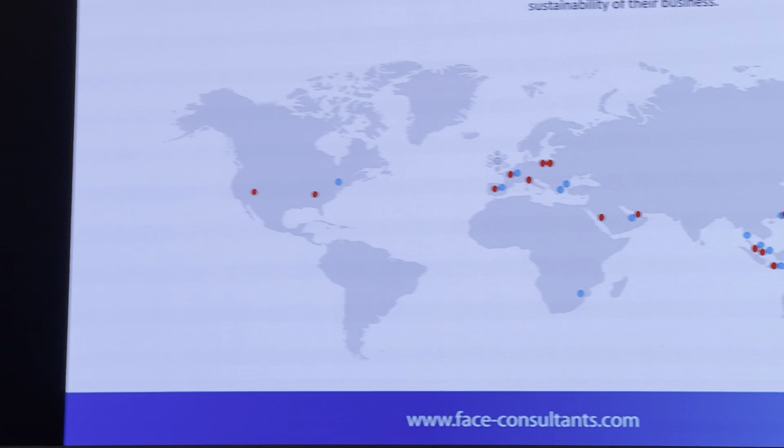So we're going to just flick in here, a little bit of things out of the way first of all. Face Consultants, this is a dual presentation anyway. Face Consultants is part of the CoGri group, and I'm doing this presentation under Face because it's a bit of a consultancy exercise. So Face Consultants are experts in the design, surveying, and testing and commissioning of concrete flat floors. We're also independent. Face is independent from CoGri when it comes to the consultancy work that it does.

CoGri, on the other hand, is a solution provider for design and construct of high performance, high tolerance concrete industrial floors. And these solutions are fit for purpose. I think on here you can see we've got red dots and blue dots. The red dots are CoGri and the blue dots are Face. So you can see that we're scattered around the world, making the world a flatter place.

So on to the next one. Today we're trying to make it more localized. So in terms of our setup in this area, our head office for Asia is actually in Singapore. We have a satellite regional office in Seoul, Korea, and from Singapore, for the ASEAN region, we have an office here in Kuala Lumpur, and we have FACE and CoGri there, and then we also have an agent in the Senai area.

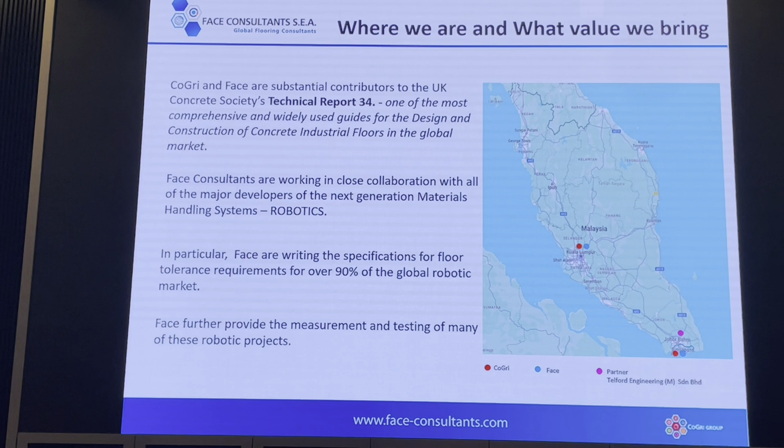Yeah, there you go. Amazon are one of our big clients globally, and they've got robotic stuff all over the place. There's a lot of other people getting into it now, and we write the specifications for over 90% of the market. Sorry, floor specifications, not robotic specifications.

Okay, I'm not going to read out all these words. I think we'll just get to the point here. Where is it? Okay. Just thought I'd give you a little bit of my background and how I became involved in flat floors, because it's a lesson. First of all, I graduated from the University of Dundee in the UK about 1974, with a degree in civil engineering. And I've been registered as a professional engineer in Singapore for over 34 years.

Overall, I have 50 years of experience working in the construction industry, not always in floors, but in general contracting and other specialist type of activity. But for the last 30 years, I've been involved in CoGri and developing the flat floor technology in Asia. Now, our head office is based in the UK, and the guru of our business is actually based in the UK, but he does pass on a lot of information to us.

Now, it was in 1991 when I was working as a design build contractor that we were approached by a European company to build the floor, and they said they want to do it for a VNA. I said, well, what's a VNA? So I didn't really know. Building tall buildings, you don't do VNA in tall buildings. So it's my first experience of talking about logistical facilities. So what's VNA? VNA is very narrow aisle. All right, okay, I understand. What do you want from that?

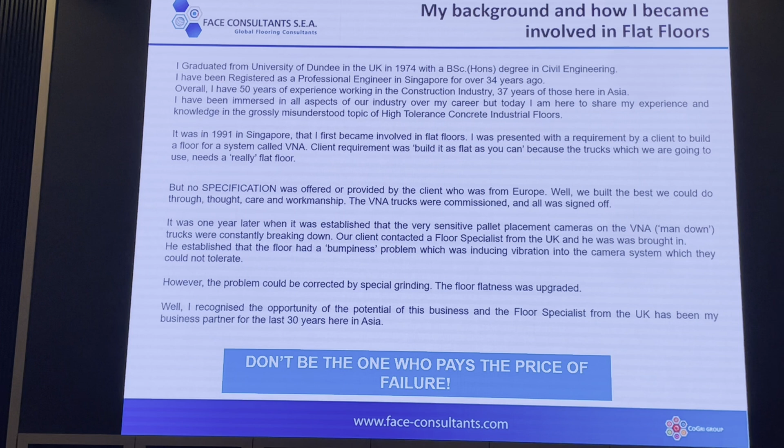And the big thing that came out of it all is that he and I became partners in Asia. So that was how I got into this business. But I was lucky, so my advice to anybody is, don't be the one who pays the price of failure. And I wasn't, so I was very lucky.

Okay, where do we start? Alright, so the whole point is fit for purpose, so we need to give a definition to that. What something is supposed to do, how it is supposed to do it, and what standards it must meet in order to be considered successful.

Right, what is fit for purpose in a warehouse or an industrial building or a logistical building? Yeah, the warehouse, the materials storage system, the material handling equipment, and the floor must act as a single interconnected system and perform optimally. So they all come together to work. The machines that they put in there, the mechanical handling equipment, they need the floor. So this is one of the starting points that we need to get established.

In the next 10 slides, I'm going to try to identify most of the key people who will most likely be involved in floors which need to be fit for purpose. And following that, I thought it'd be useful to give a bit of history on the development of high tolerance floors. Because without understanding the history, you can't understand what the problem is. Of course, there is a problem.

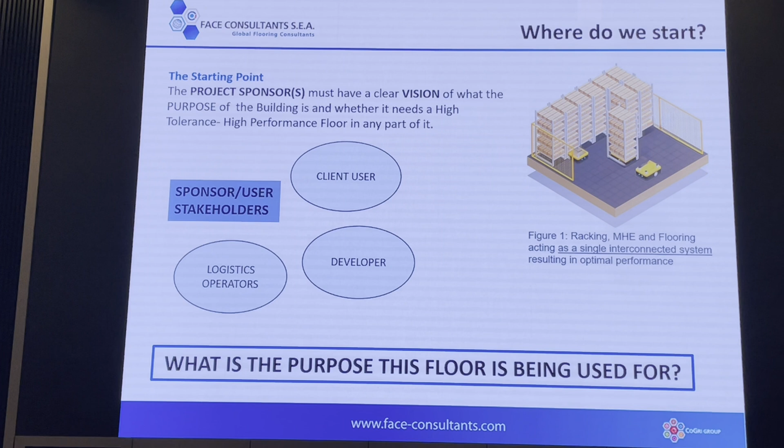Typically, buildings with flat floors only have a flat floor in some area of the building. It's not the whole building sometimes, especially in the office. You don't need a flat floor in the office. You need it where you need it, and you've got to decide which part of the building has to be flat. But these should start off with what we call the project sponsor.

And it could be the client user, it could be a developer, it could be a logistics operator, right? They have to have a clear vision of what the purpose of the building is and whether it needs a high tolerance floor. And these people that are going to sponsor the project, they're people that want to maybe use the building as a facility for supply or whatever it is.

And basically they'll go to a materials handling company, or they'll go to a system integrator. A system integrator is a company that specializes in integrating equipment and racking and all the rest of it, bringing it all together, working out throughputs and productivity. And these material handling people will advise the project sponsor on how he needs this building to function. And they're typically, as I said, material,

Pointer problem. Here we are.

Right, so we've got material storage suppliers, system integrators, and MHE providers. MHE meaning material handling equipment. So they're the second set of people, and they honestly have to rely on the floor. If the floor's not right, there's not much they can do about it. They need to come up with their specification as to what the floor should be.

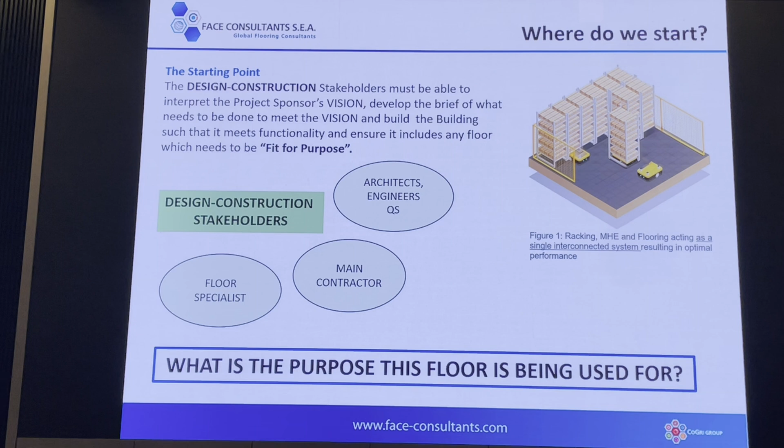One thing to remember in this development is that not all concrete floors require to be high performance or high tolerance, and they can still be fit for purpose. We're not trying to do floors just because we want work. If somebody can get a floor that's plus or minus 100 millimeters and it works, that's what it needs to be. So you don't waste your time on work like that. But floors are becoming more and more important with time.

Okay, so as I said earlier, we talked about the history. We are going to talk about really the history behind why we've got the specifications for flat floors. So I looked up Google and said, what does history teach us about construction? And just to give a definition from Google, we can learn from the mistakes of the past, build on the methods that worked, and repurpose old ideas to create new ones. The history of construction is endless, and new techniques and materials are created every year.

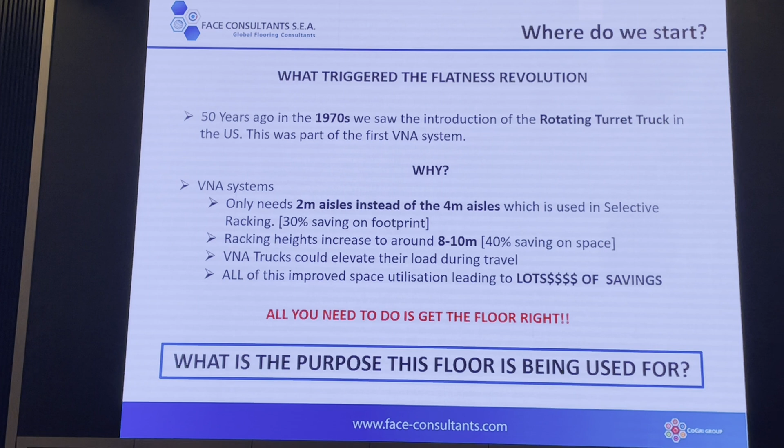So 50 years ago, that's the 1970s, we saw the introduction of the rotating turret truck, a VNA truck, in the US. The US were first in doing this, and this was part of the first VNA system. Why? VNA systems only need 2 meters of aisle instead of 4 meters of aisle, which is used for selective racking or general storage. This creates a 30% saving on footprint.

The next one is the racking heights increased to around 8 to 10 meters, 40% saving on space. And the VNA truck could elevate the load whilst it was travelling down a very nice flat floor. It could elevate itself while it was travelling and then place the pallet, all giving good productivity. We want 2 machines, not 3 machines. We want to be efficient.

And all of this improved space utilization leads to lots of savings. We do not create equipment and things just for the hell of it. We do it because there's got to be a purpose. And the purpose is to save money and utilize less land and all this.

So, it didn't stop there in the 70s with the VNA. At that time, in the 1970s, that first machine I was showing you there would probably do about 8 meters. In the 80s, it went to 10 meters. In the 90s, it went to 13 meters. In the 2000s, it went to 15 meters. In the 2010s, it went to 17 meters. And they're now telling me in the 20s, we're now up at 20 meters high with these machines.

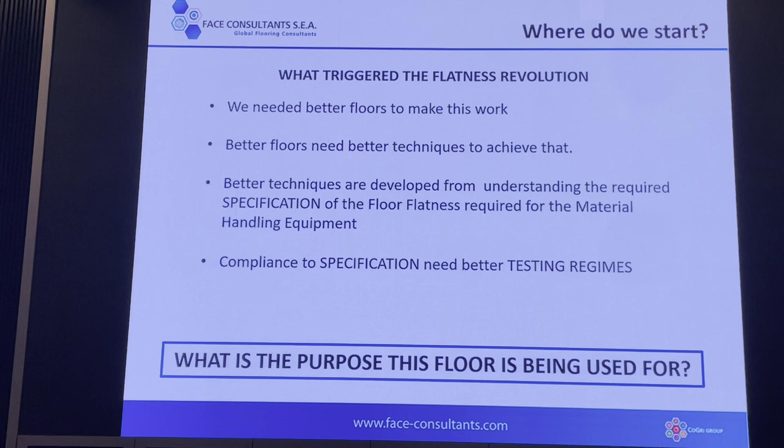Right, so this VNA development in the 70s led to a decision in the US to review the flatness requirements of all types of floors, including industrial, commercial, and ancillary. But I will tell you now, it has not kept pace with this since its inception. And we're going to address that one a little bit later. And again, I mentioned robotics. We're now in another revolution going on called robotics. We're going to also deal with that another day. So you can see I'm streamlining the talk because it's a big, big subject.

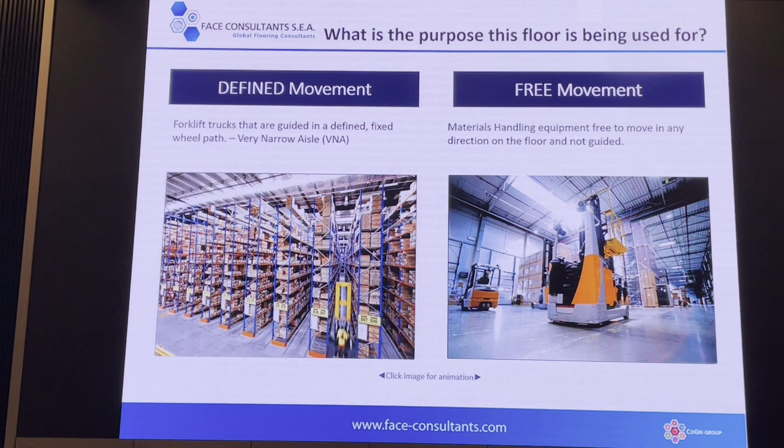But some of these systems are part of one of two categories. There's two categories for definition. This is the first point to take note. One is defined movement, and one is free movement. So, defined movement is like we started off talking about, the VNA. That is defined. What does that mean? It means that the trucks are sitting in one track all the time. When they enter that aisle system, they run up and down, the wheels are running in the same path, day in, day out. And it doesn't change.

So the specification for the defined movement is to deal with the wheel path in front of each wheel, but also the transverse, because you don't want the forklift trucks hitting the racks and all this, and you need flatness for all that. So that's one aspect, is defined movement. I think it's called something different in the US. This is the TR34 British name for it, defined movement.

The free movement, on the other hand, is where trucks can move anywhere on the floor. Unfortunately, due to technology of the slide system, they can only move across the page and up and down the page. But actually, we know that free movement trucks, or normal forklift trucks, can do U-turns, they can run diagonally, they can do anything they want. But we didn't manage to find out how we could do that pictorially. So this is the difference. Free movement trucks can move anywhere, VNA are stuck inside the aisle.

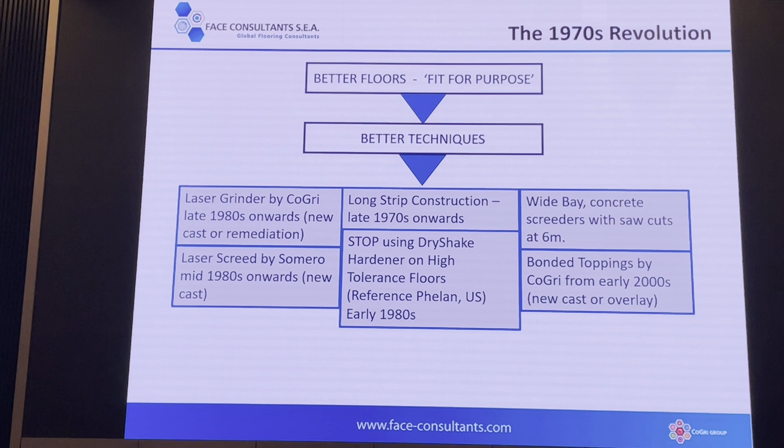Right, so what we said was that better floors that are fit for purpose need better techniques. So I've only listed a few here, just to give you a feel for what we're talking about. So the one in the top left-hand corner, the laser grinder, which was invented in the late 1980s. And this machine actually can grind concrete to correct VNA aisles for the use of the VNA truck. And it can do old floors, or it can be done on new floors. So that was one machine that came out that made floors a bit better.

The second one here is down below, and this is the laser screed by a company called Somero. And I would say that this laser screed has built the most floors worldwide, but these floors tend to be on the ground floor. This is one thing we need to understand. Floors in Europe, the UK, and America, basically they build all their logistical facilities on the ground floor. You'll see the picture in a minute about that.

But basically, the trucks with the concrete can come in and do direct discharge, and then the laser screed can guide it, level the concrete out, etc. That is the first part of the action. And it vibrates, so it places all in one, so it's mechanized. And that's how this machine revolutionized the industry in terms of doing bulk, large pours.

There was another system, which is the long strip system, and this was also for VNA, and basically it's a way of setting up the concrete and casting the concrete in narrow areas so we can control the levelness across the aisleway. And this became very, very popular. We did what we thought was the first super flat floor in Asia. We did it in Singapore in 2000. So that's 24 years ago. We did that one with long strip, and it was spot on. It was a DM2 or category 1 at that time.

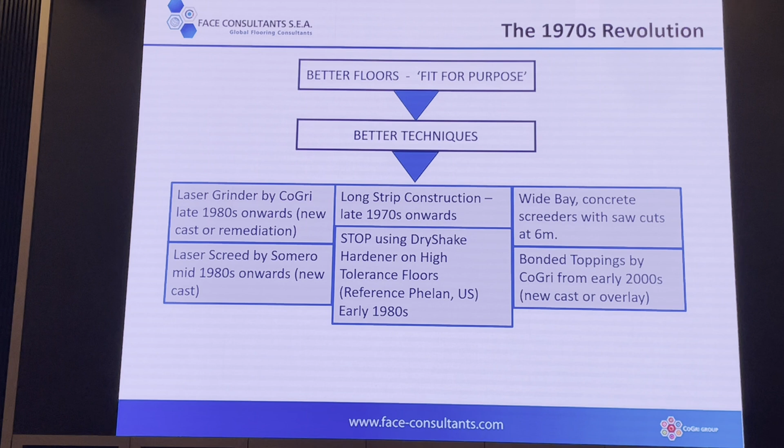The one down below, bonded toppings, is something that we developed in 2000, just after the super flat floor. There are certain countries in this part of the world that have not so much land space. Singapore's obviously desperate for it, and if you talk about doing flat floors on suspended levels, Singapore and Korea probably lead in doing these things. And the only way to achieve really proper floors in elevated buildings like level 2, level 3, level 4 is to do a bonded topping.

And that means you get the floor constructed, you get the building constructed, you close it off, and then you come back and you do a secondary floor on top, bonded to the structural floor. This bonded floor actually gives you the floor specification. It gives you the flatness, and it gives you the soundness within the environment, which we're going to talk about as well. Now I'm going to come back to this one down the bottom because it's a bit contentious in Malaysia, I have to say.

All the time that I have been, and maybe I should say something now, we've been doing work in Malaysia now for nearly 30 years, maybe 25 years, something like that. And we set up a company in 2008. We actually put a company in place at that point in time. But we are very well aware of Malaysia. I've done a lot of other work in Malaysia as well.

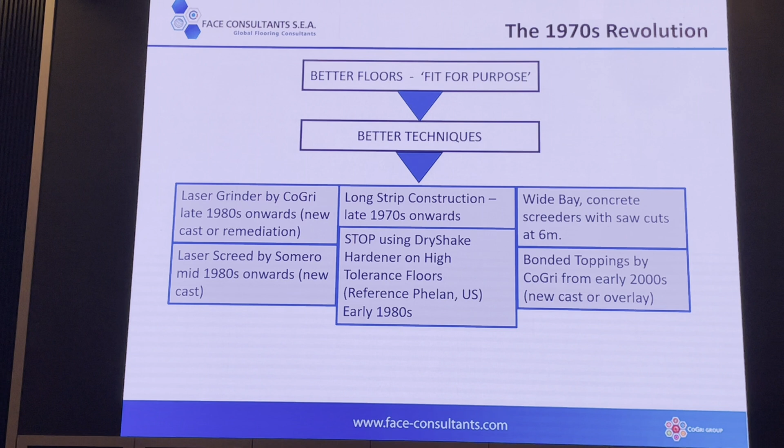But there is an issue in Malaysia where there's a myth, and that myth revolves around dry shake hardening. So in the US in the 70s, 80s, there was a very top level concrete guru called Phelan. You can go on the internet and find out plenty about it. He did a lot of special precast and all that. And he said, maybe only 45 years ago, you want a flat floor? You want a good floor? Stop using dry shake hardener. I'll repeat, stop using dry shake hardener. It makes it more difficult to get a flat floor.

We knew this 45 years ago, and I'm sorry to say that we have this problem here in Malaysia, that hardeners are seen to be part of the process of getting a level or flat floor. Nothing could be further from the truth. And the second part to that situation is that in certain situations, having a dry shake hardener on top can lead to other problems like delamination, right? So we can go into that one.

People can ask, and the panel will answer the question if people want to know why. I'm not going to do it. It's maybe for my technical people here to tell us why. So if anybody wants to know, why? No? Okay. Maybe ask after.

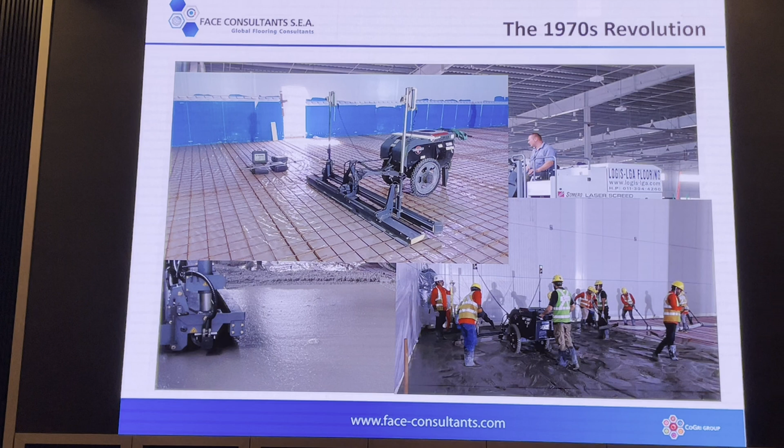Okay, so back to better floors. Better floors, which are fit for purpose, need better specifications. So the floor specification in the US, because they were the ones that started all this review, don't blame the Brits, right? It's Americans. So they said, look, we're going to have a look at this. And a guy called Allen Face, if you look at the Face consultants, there is a connection. But anyway, it's a long, long time ago. Allen Face introduced a floor flatness numbering system in the late 1970s, which later became known as the ASTM E1155.

FF numbers and FL numbers, and that was what was established. And this was established by the American Concrete Institute. And I'll tell you a little bit about that later, because one of the problems comes from that. I'm not here to criticize the ACI or the ASTM, by the way. I just want to explain to you what this all means. And since the 1970s, this specification had minor updates, but it hasn't changed the fundamental approach to it all. And a lot of times now, it's no longer relevant to what's going on.

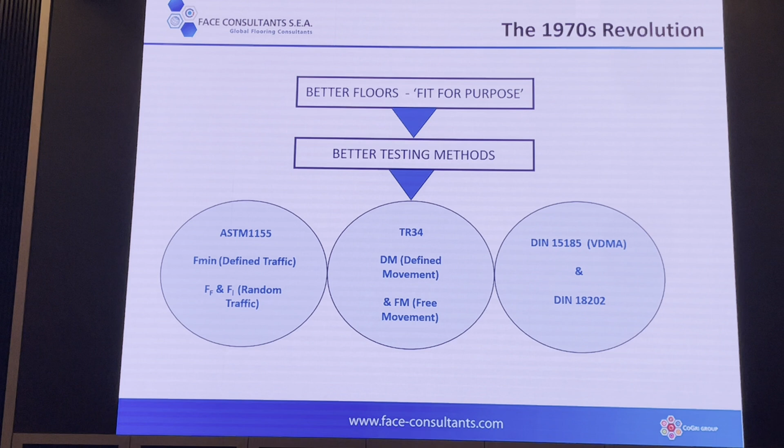Right, so better floors fit for purpose, we needed better testing methods. So at the same time that they developed the F numbers and all this stuff, we say, how are we going to test it? We might say we're going to do this, but then how are we going to test it? So the ACI did their bit, and I'm just going to differentiate across the top here now, and maybe I can point to it.

This one, ASTM 1155, FMIN, defined traffic. TR34, defined movement. Same thing. DIN 15185 and VDMA. Same thing, measuring the, well, free movement. Sorry, defined movement. Then one down here, the F numbers were produced for random traffic flows. I know that around Malaysia, they try and use this system to do this, and it's not right. But anyway, never mind. Free movement, FM in the UK, so FM means free movement, DM means defined movement.

And the Germans put out their one too. But I'm not going to talk anymore about the German one, because again, it's another subject. It could take another hour to talk about the German one. We're going to focus on the ASTM and the TR34, because those are the ones that are used around this area.

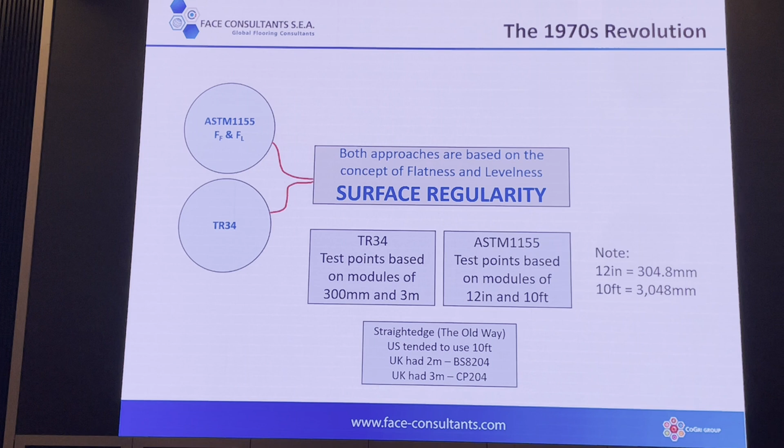Right, so we can see here the ASTM 1155, FF and FL, and TR34, basically I should have done the free movement. Anyway, both approaches are based on the concept of flatness and levelness. So they agree, their approach is to define something to do with the flatness and the levelness. And TR34 said, okay, if we're going to test the floor, of course it's all done by finding out what the elevation of the floor is doing at each point. They said, we want to test points based on modules of 300 millimeters and 3 meters.

They were following the Americans, because the Americans did it early. And they were doing test points based on 12 inches and 10 feet, because America is still imperial, and UK and Europe were very metric. So there is a connection back into the old specifications, because you can see down at the bottom here, straight edge, the old way. US tended to use 10 feet. UK had 2 meter and 3 meter straight edges. So this is all connected into the new, you're still trying to retain some of the old stuff.

But if you note on the right hand, that note says 12 inches is 305 or 304.8 millimeters, and 10 feet is 3 meters. So we're actually really measuring the same way and doing the same thing. It's the interpretation of the results that's the difference, not how we're doing it. So, high tolerance, surface regularity. It's just one part of it.

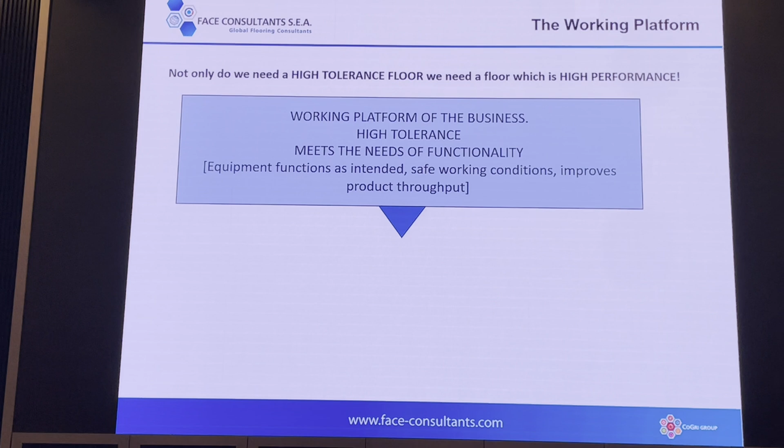So anyway, the first part of it, which is the high tolerance for functionality of the forklift trucks, it meets the needs of functionality. Equipment functions as intended. It's safe because if you've got bumpy floors, they're going to potentially cause accidents. And it improves the product throughput. If the machine's working at the maximum speed it can work at, it's going to give them the most productive warehouse. But high performance is a little bit different.

Okay, again, it's like the other switch. We're also talking about the flatness and how the thing changed. So the driving of the technology to get the flatness came from the equipment. But I'm going to do a little bit now on this high performance floor, because nowadays it's very, very important for a lot of people. So, 5 pillars to get a good floor.

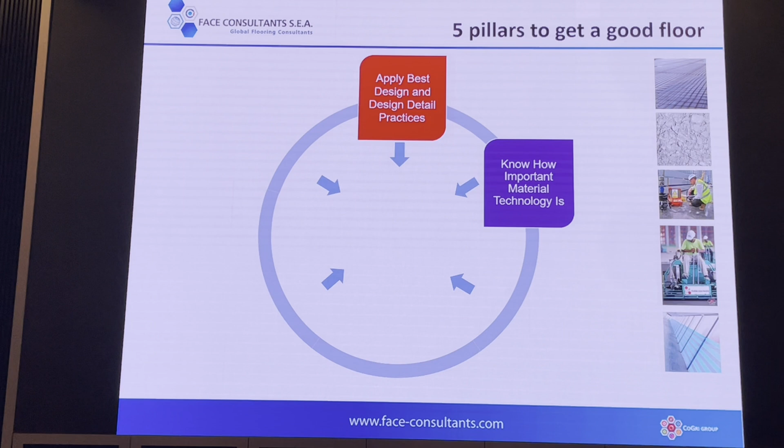Point number 2 is the know-how: how important material technology is. I was talking about this yesterday to Mr. Leon and his team about how we view things. And one of the problems in most parts of the world, a flooring contractor, if he wants to lay a flat floor, as long as he's got a good design, the next thing he needs is good material. Well, good material means concrete mix design. People don't understand that the mix design is so important in getting the floor flat, but also keeping it workable before you can get it all burnished off. So if you let that control go, it's a problem.

Here, the main contractor will say, I don't want to let you buy the concrete, I'm going to buy the concrete. Okay, you want to buy the concrete, that's fine. But basically you can't tell me what the mix design is going to be. The concrete we put into the floor is different from the concrete we put into the columns and the walls. It's not the same concrete. There you just put it in and you vibrate and it's finished. I've done plenty of it in my 50 years. But the concrete that you put into the floor has to be a special recipe.

Like your best pancakes in the world, they've got their own special recipe. If you take somebody else's recipe, you can't get the pancake that you want. This mix design is very crucial.

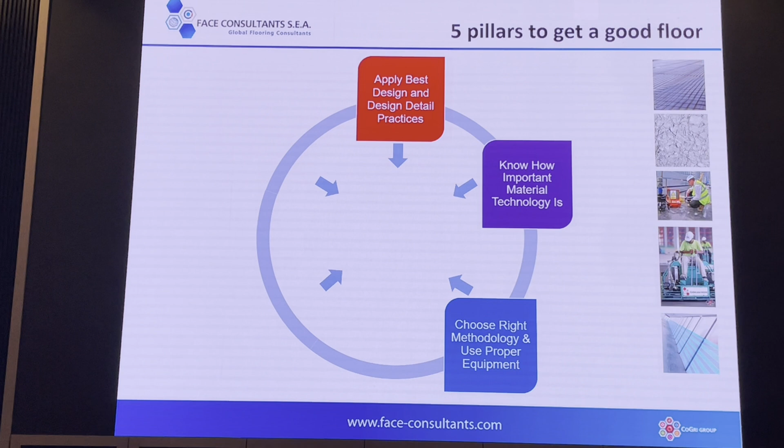These first two subjects are subject of a separate talk. Number 3, choose the right methodology and proper equipment. So earlier I showed you pictures of the laser screed and the CopperHeads. So basically, you need the right equipment to do it. So different ways of doing things. For VNA, you can use narrow, long strip construction, which is a narrow aisle, and basically you have to use certain types of equipment on that to get it.

When you do a large pour, you use those big machines, and in between you've got the CopperHeads and things. And there's other machines. So people need to know what equipment to use, and they have to have proper equipment. You can't have one machine and it breaks down halfway through the pour. You say, oh, what am I going to do now? That pour is ruined. So you need backup, redundancy in your process. So there are all these things you've got to think about.

The next item is, you need to engage the right people who know the flat floor technology. In Malaysia, achieving the highest tolerance of flat floors can be done quite readily. It is not difficult to do. With teaching, understanding and learning, all this can be done. Right? We've done it. We went into Sri Lanka about 3 years ago. They'd never done anything like it before.

We went into Sri Lanka. In fact, the second time we went, we did a floor, and everybody talks here about how difficult it is to get an FM2 floor. We produced a floor which was FM1, the highest tolerance of free movement. And we did it in Sri Lanka with people that had never done this thing before. So, you know, it can be done if you know how to manage it and do it.

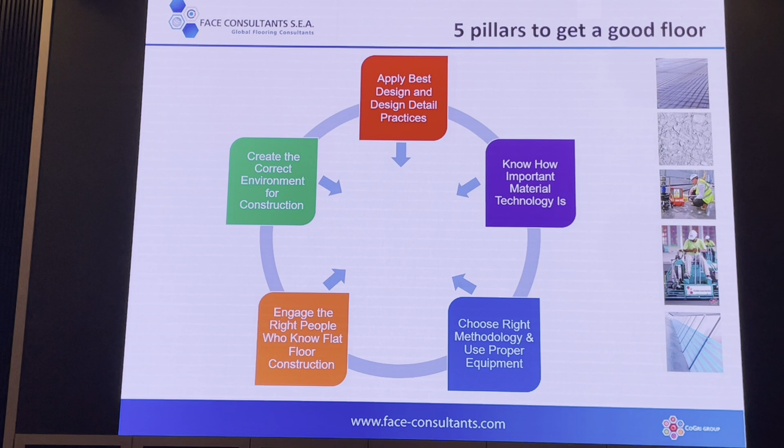But if you want a really good super flat floor, the rest of the world out there is doing these floors in the right environment. And you guys in Malaysia are not doing that. The number of projects I hear, you want a super flat floor without the roof on, without the walls in. This material that you've just chosen, spent a bit of money on, the proper mix design, it doesn't stop it from being affected by not only rain. Rain's a big problem. When rain comes onto a concrete surface, it ruins it.

But you've also got wind and sun. What do wind and sun do? You're trying to get a floor like a defined movement floor for a VNA, and you're trying to get 1-2 millimeters finishing. Suddenly the sun comes out and it's really blistering down. It will take all the moisture out and you can't get it finished at the right level.

It's a problem. And we have to first of all get everybody to understand and accept that you need to find ways to stop this. Every building in the world, in the UK, in Europe, in America, they're trying to do a really top-class floor. They'll get the frame up. Well, we did it here with Berrington with Tesco. The whole building has to be, the frame has to be up, the walls have to be up, and there has to be no leaks coming in and all the rest of it. The thing is, to build on a building like that,

if a builder can build a building at 1,000 square meters or 1,200 square meters a day, then we have a problem keeping up with it. But generally speaking, if you build a building and it may be a 30,000 square meter floor, it will take him maybe, I don't know, 16 months to do all that. But the floor, when you're using laser screed and you're doing pours with 35 meter by 35 meter panels, you're talking about casting 1,200 square meters a day. So 1 week, 10,000 square meters.

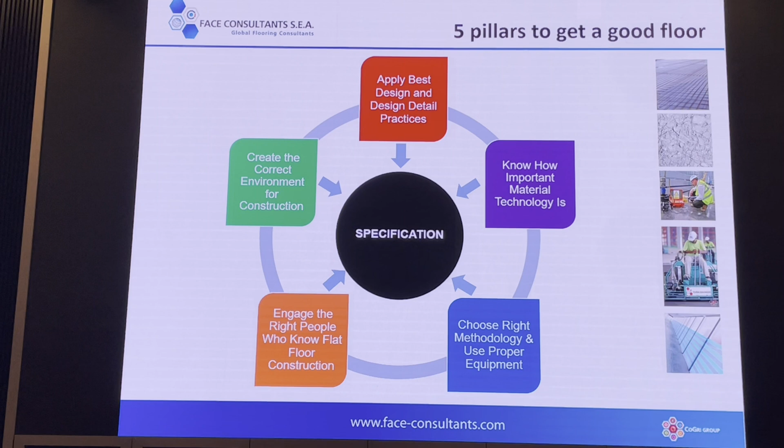Right. Now, all these things, these 5 pillars, have to be brought together in a specification. In the handouts today, I've put in 2 specifications. One's a performance specification for SFRC floors. You should not see any word of CoGri in it or face in it. It's a generic spec. But SFRC floors should be designed by the flooring contractor. Steel fibre reinforced concrete floors, sitting on piles. Let the specialists do it because we do it all the time.

The other one, which we do a lot, is bonded topping. So we're giving you a particular specification for a bonded topping. You can specify that to the guy that's going to do the floor. But again, the development of the specification is based on what we developed 24 years ago, and it works very, very well. So basically that specification should cover all these types of things, methodology, etc. And following that, we just double back on design, serviceability, and construction.

Building a floor which is fit for purpose starts with the design, I've already said this, and must be reflected in the design detail and emphasized in the specification. Most design failures are in the detail, not the calculation. Please retain that knowledge. Serviceability is a big part of this. It's critical in the context of high performance, high tolerance. Special attention must be given to key issues such as deflection, cracking, construction joints, isolation joints, abrasion resistance, skid resistance, and so on.

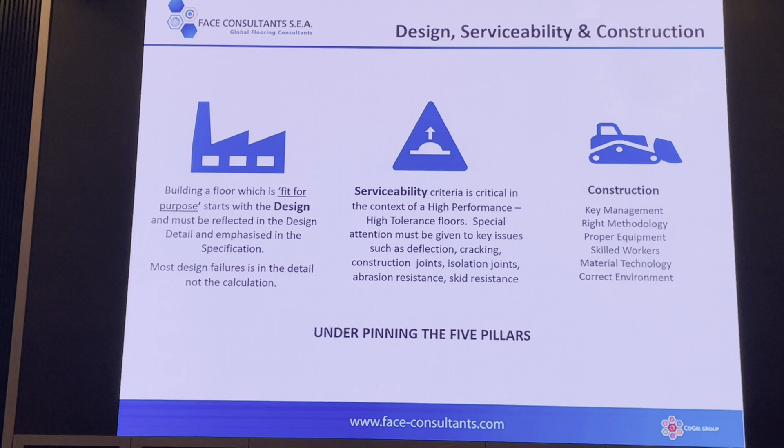Okay, so once you've got your design and your detailing and your serviceability, then you're back to the construction one. So key management, right methodology, proper equipment, skilled workers, material technology, correct environment. These are to underpin the 5 pillars. So we come back to the 5 pillars. We talked about design, so we're not going to talk about it anymore. We talked about material, we're not going to talk about it anymore. You guessed it, we're going to go around the whole lot.

Yet another focus moment. 97% of all concrete industrial floors are used for free movement activity. 90% of the 3%, which is defined movement floors, are specified using TR34. This is for this part of the world. And customers in most cases do approach specialist flooring contractors to do this.

People have caught on to long strip, not saying that they do it right and all the rest of it, that would be subject to testing. But, you know, defined movement has got its own way of doing things. It needs a lot of care to get it right. So today I'm only going to focus on free movement. There's a lot to get through.

Can I do that? Okay.

Does the floor need to be high performance, high tolerance? Well, no. As I said earlier, not every floor needs to be high tolerance. So if you don't think it needs to be high tolerance, fine. You go and do it the way you want to do it, conventional floor, whatever it is. Just do what you normally do. Some of you might come along and say you're not right, but that's another story. It depends what your client wants.

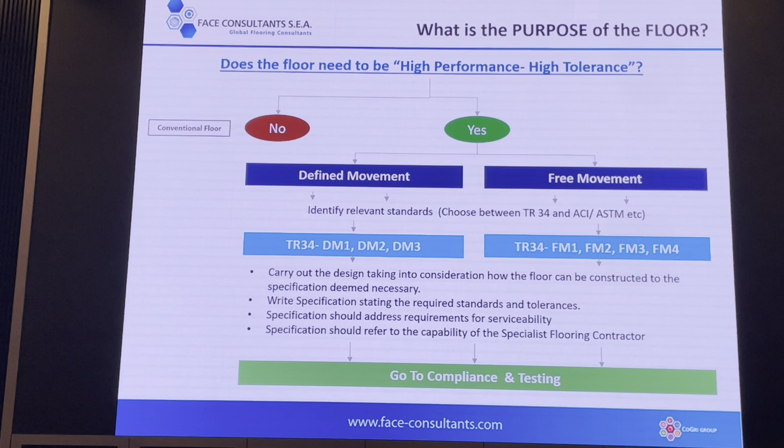Very obvious, we carry out the design taking into consideration how the floor can be constructed to the specification deemed necessary. Write the specification stating the required standards and tolerances. Specifications should address requirements for serviceability. And specifications should refer to the capability of the specialist flooring contractor. How often is that done? Okay, and after you've got that done, you will go to compliance and testing.

Alright, but we're going to drop off defined movement now. We don't want to talk about it because it's a small matter, and we're going to focus now on free movement. Okay, just to give you a bit of a global lesson on these things, defined movement on the left-hand side: in Europe, we're using TR34, except in Germany, which uses DIN, and maybe Poland as well. Then on the free movement side, in UK and Europe, we're also using TR34, and again DIN. In the USA, as you would imagine, ACI, ASTM, that's what they're using for defined movement and free movement.

In Asia, defined movement, there may be some people talking about using something, but predominantly around Asia, since we've been around 30 years, we've managed to push TR34 quite well. On the right-hand side, free movement, there's a lot of countries that are using ACI, ASTM, and there's a lot of people using TR34. And I'm going to explain the difference between the two, what are the advantages and disadvantages of either.

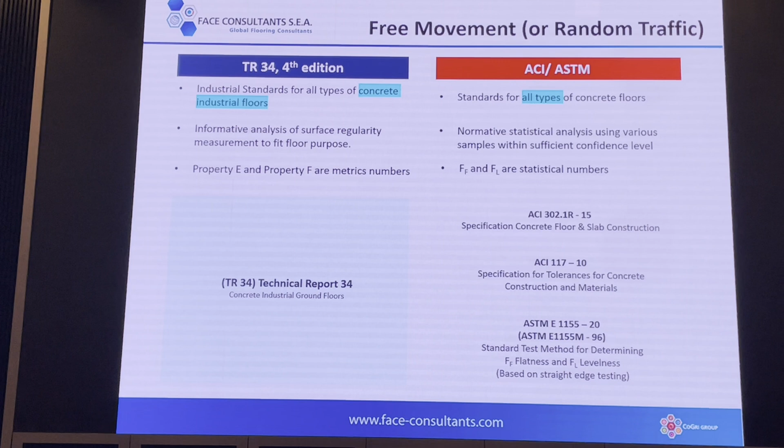Therein becomes part of the problem; it needs to be updated because industrial floors have taken on a life of their own. And as I said, with robotics, it's even more critical. Let's go to line 2. The TR34 is an informative analysis of surface regularity measurement for a fit for purpose floor. So basically, it's based on what they know works for that particular usage.

The ACI one gives you a normative statistical analysis using various samples with sufficient confidence level. I don't know what that means, to be honest with you. But anyway, I know it doesn't work, that's for sure, because people don't know what to use. So TR34 works on property E and property F, but actually it works on a few other things, which we'll point out and show the difference. These property E and property F are not the same as the FF/FL, which are statistical numbers, not real numbers. Property E and property F you'll see are actually something that you can physically see and understand.

The thing about the TR34 is it's one document. Everything about flat floors is in TR34. And in particular about surface regularity, in 4 pages, all together, easy to understand, and you will see it on your card there. Free movement, what I showed you earlier. Free movement, defined movement, most of it is in there. So it's easy to look at and also focus on.

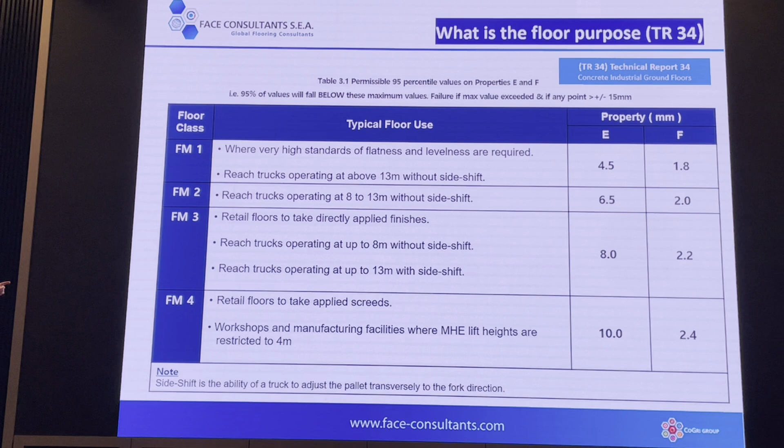Obviously, you've got property E and property F. Now you guys don't know what property E and property F are yet, but you're going to see that in a minute. But you can see that the bigger the number, the less quality there needs to be in the floor as you go down those specifications. So you can see that they open up the dimensions for it. Any questions?

Right, now to explain this, I'm going to take you through a very simple exercise. So I've set it up, click the button, it can show you what's going on. So basically, this floor is 10,000 square meters, and it's 100 by 100 meters square. This is a floor we're going to construct. Forget about the thickness of that floor. We're going to do this in 4 castings of 50 meters by 50 meters.

And we've got the chart set up. What are we going to cast? As I said earlier, FM2 is a great place to go. So we're going to do FM2. So for FM2, we need property E of 6.5 and property F of 2 millimeters. First rule: the floor must be constructed such that no part of it falls outside plus or minus 15 millimeters.

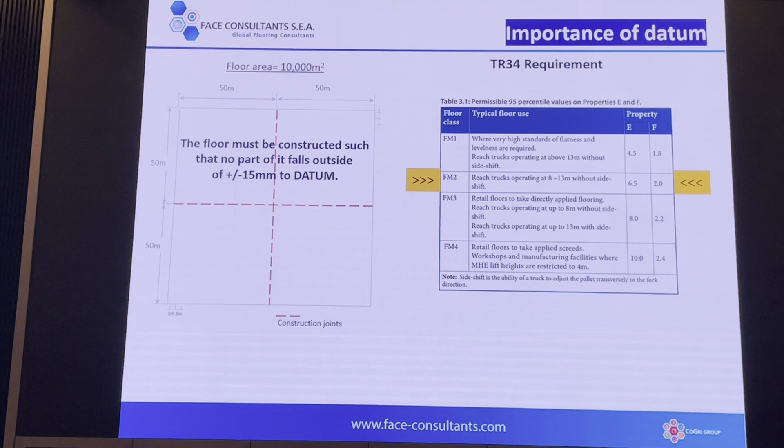Second one is, if a construction joint falls within a zone or area which is integral to the functional use of the floor, then all testing should be continuous across the construction joint. Does anyone not understand what that means?

Just to let you understand, if I'm a reach truck and I'm driving from here across here, I don't suddenly get to the construction joint saying, "Oops, stop. That's not part of what my truck can ride on because it's done separately." This is not what you can do. The truck's going to go from there to there. That construction joint needs to be the same as the rest of the floor.

When I talked yesterday, it was like, I understand what's going on here now, so it's a bit of an issue. We'll show you in a minute why you should be using TR34, I believe, or certainly should be doing something different in ACI.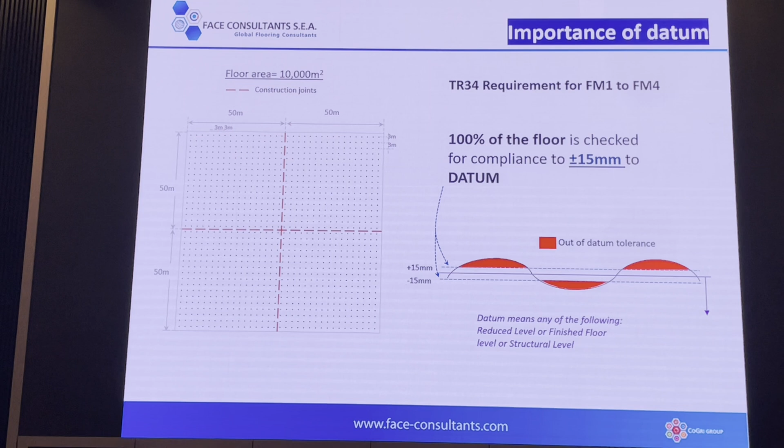So the floor can be like the one that's shown here, up and down. But if it goes outside the plus or minus 15, that red area, it's out of tolerance. So the first thing we need to do is to check 100% of the floor to this plus or minus 15 millimeters from the datum. The floor should be surveyed using an optical level at points which are 3 meters apart. Came back to that 3 meters I mentioned earlier. So we measure the points at 3 meters, center to center in each direction, but not diagonally. Just up and down and across.

So you can see at the top there, you've got 3 meters, 3 meters, 3 meters, lots of 3 meters across there. So we have to measure every single point with an optical level. Then, when we do that, all those points there are at 3 meter centers on this grid. So I'm going to go down to here. Sorry, I'll do this bit first.

To check for property E, you need to calculate the difference in level between any two adjacent points, 3 meters apart in each direction, not diagonal. The difference should not exceed the limits as required for the category of floor. So property E is checked for 100% of the floor.

So basically we're checking the floor 100% for datum and for property E. But we do the optical level check for every 3 meter point. We get the answer to both those questions: one, if it's out of datum, and secondly, if the tolerances between two adjacent points are out of spec.

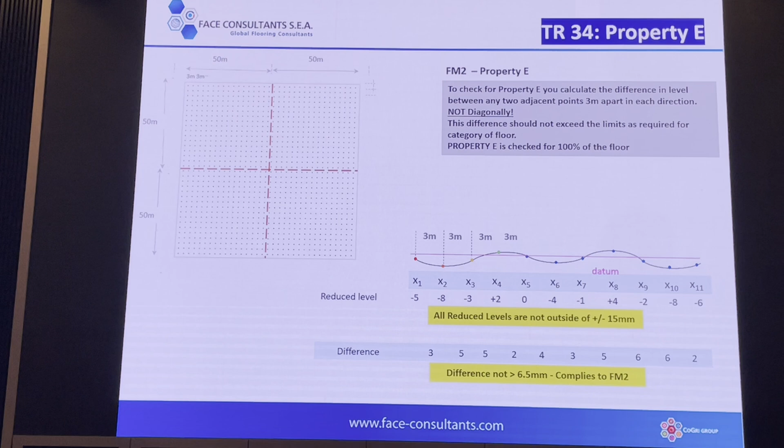Now, I go down to the next one down here, and the difference in level between those 2 points, -5 and -8, is 3. The next one is 5, the next one is 5, the next one is 2. Understand? Yes. So, great. So, all these dimensions down here, we all measured. The difference is not greater than 6.5, so it complies to FM2. 100% of the floor has been checked for levelness and datum.

Now, we move on to the next phase, which is to check the flatness. Property F, or FF when you see it in the other one. So trying to explain this one is not that difficult. Basically, what we're showing you here is where we start using the 300 millimeter. How you measure the 300 millimeter, there are various ways of doing it.

But what we're taking with the 300, every point, 300 to 300 to 300, we're checking what is the rate of change of gradient between those 3 points. And then we move down 300 and do it again. Now we have equipment that can do that automatically, so you'll see it in a minute. But basically, showing this one, there's 3 examples here.

The first one is when we're starting at the point on the left-hand side at the top, that point goes up 0.6. 300 millimeters up 0.6, and then the floor comes back down 0.2. So we look at the property F, it's 0.6 minus -0.2, so the rate of change is 0.8.

The next one is pretty flat. You've got -0.2, and then it gets to that middle point, and then it keeps on going to another -0.2. So -0.2 minus -0.2 is 0. It's flat. You can see it's flat.

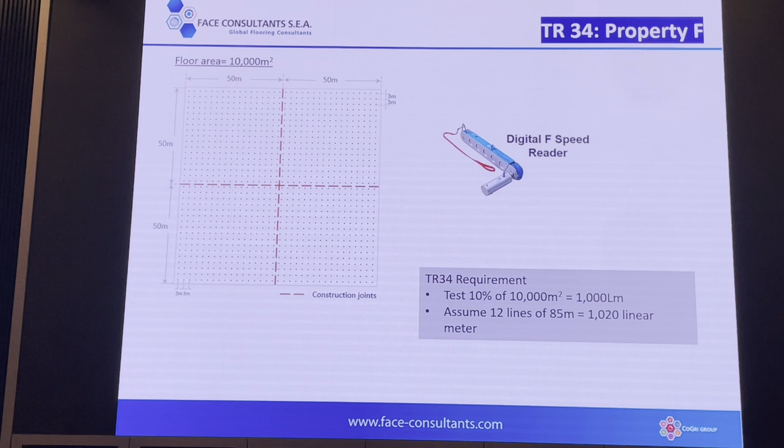So we take the 12 lines of 85 meters and we plot them onto the area that we're going to test. And you can see that we're measuring through the construction joint. We're not stopping either side of it. That'll become relevant in a minute. And then we want to do another 6 lines that way. So we're measuring in both directions to get a good sample.

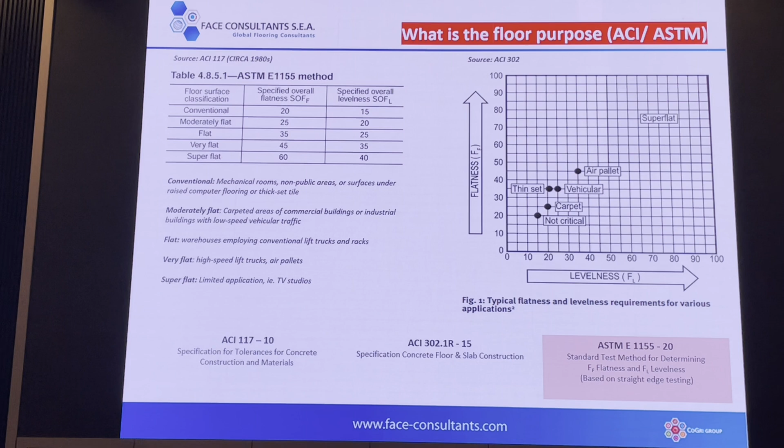So the FF/FL, establishing what you want, it's only through experience that it will say that FF/FL building is equivalent to a FM2 or FM3. This is what's happening at the moment. So there's a bit of a fudge going on. And you can see I'm a bit negative about it, but I'm not negative. The ACI ASTM is not something that is wrong in itself. It's the interpretation and the use of it that's causing the problems. So this is what we see here. Let's assume that we can use the right FF and FL. Anything else to say on this one? No. Next one.

This specification for FF/FL that everybody's punting in this marketplace, it doesn't address datum. There is no requirement for datum check on the ACI ASTM specification. And I can tell you where all this started was in America. They built floors in a warehouse at different TBMs, no relationship to datums. It's just a habit they got into. And it's causing problems now with logistical, with robotic projects. Those are case studies we're not doing this afternoon. Another time we might talk about it, but they're not dealing with the problems it's causing. We're doing major repairs because they're not doing these things properly.

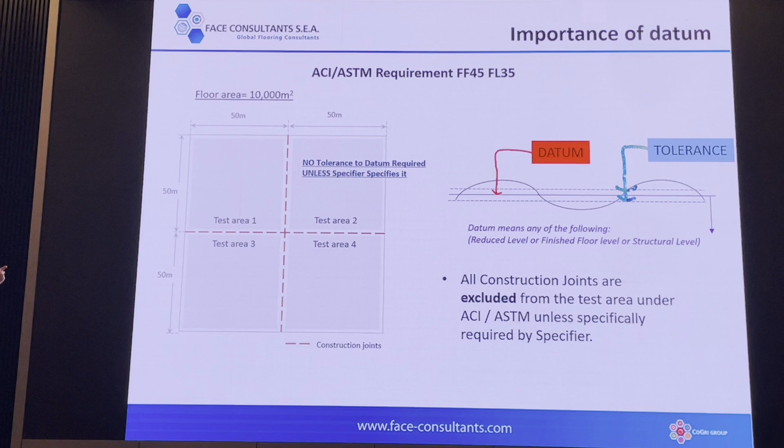There is no requirement in the ACI to use a datum unless there's an intervention by the specifier to say, you must do it to the datum, plus or minus. They do mention it somewhere in their document, but never insist that it should be done for flat floors. How can you imagine this? So we've put the datum in the tolerance. There's no out of spec. As long as they meet the FL and FF spec, there can be no out of datum, out of tolerance.

The second thing that's also a problem with this, all construction joints are excluded from the test area. So maybe I should explain the test areas first. First of all, we're dividing it up into the same 4 panels as we did for the TR34. Test area 1, 2, 3 and 4. ACI ASTM says all construction joints are excluded from the test area unless specifically required by the specifier.

So testing, extent of test sample, 10% of the test area, same as the TR34. So we've got 10,000 square meters divided into 4, 2,500 square meters, 10%, 250, you can see the similarity, 250 linear meters, and we need to do 8 equal lengths of 31 meters per test line. So we have to do a test in that area, and we're going to be so far back from the construction joint. And then we have to do all the other panels the same way. 1, 2, 3, 4.

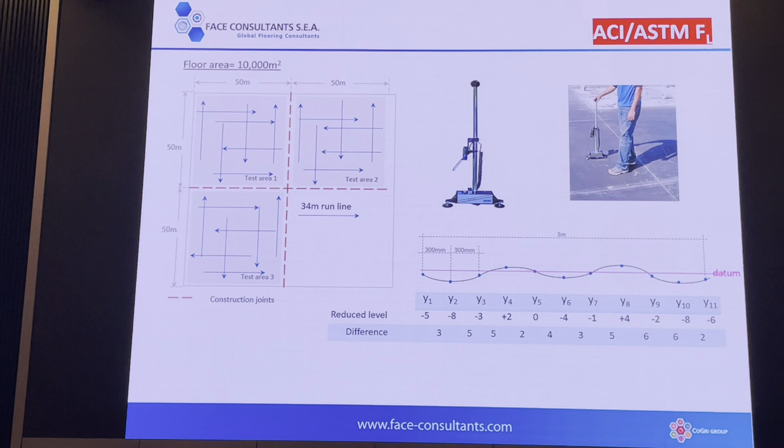I used the same data as I used before. It doesn't give you this data in that way. It comes out with a statistical number. Boom, 50, gone. What does that mean? Well, it means passed or failed. If it's failed, where is it? It's really not suitable, I would say, anymore. The way they measure it is using this dipstick, which is very similar to the speed reader, but much, much slower.

This is something that's, I'm not going to talk about this slide, we'll move on. Right, so property F, these test lines that we're doing, you see 8 test lines. Forget about that calculation, it's not important. Basically, we've got the linear meter test of the test area, the same as the TR, but it's in each different section. And basically, they're going to test it this way as well.

They've got Q points. And again, it doesn't talk about what that Q point is, if it's too high or too low, because they're going to add all the Q points up and average it out and see what it is. But when they lay these test cases, they're only 10% of the floor. Both property FF and FL are only measured from 10% of the floor. There is no 100% coverage of the equivalent of property E, never mind the datum. So basically, how secure are you when you get a floor?

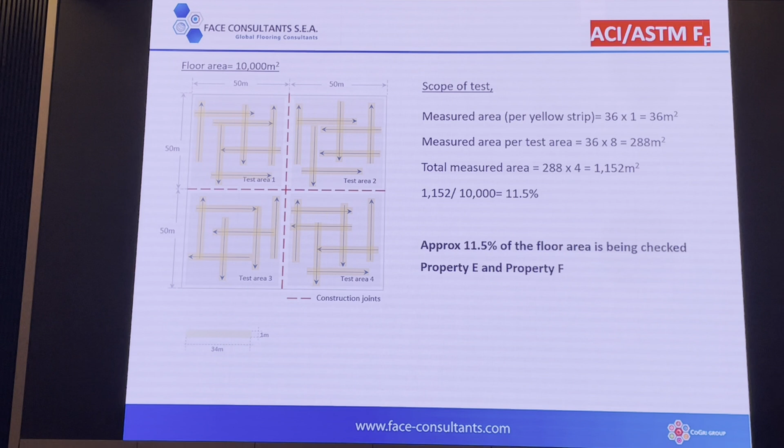And basically, where you do these test lines, the relevancy of that test line is only about half a metre either side of the test line. After that, it's a completely different answer. So we're only really getting about 10 or 11% sampling of the floor. And these days, it might not be good enough, and there's no joint to check.

If you want to check the joints, there's a separate part of ACI that does it. Basically, they're saying that at the joint, you should measure 300 millimeters either side and find out what the change in rotation is of that joint. And you do that along every joint. If you did that, that would be a better result. Somebody's got to specify what that tolerance should be. But it's never specified. It's never specified.

So you can see in the summary, the ACI ASTM, if they just apply it for what they want, it suits the guy building the floor. He can make a lot of mistakes and cover them up. But when you don't do it to datum, when you don't do it for 100%, when you don't do it to the joints, are you really getting a floor that's going to be built for purpose? Because the equipment doesn't know it's a joint. It doesn't know that bad area over there. It's a problem. Okay, I think these points are well made.

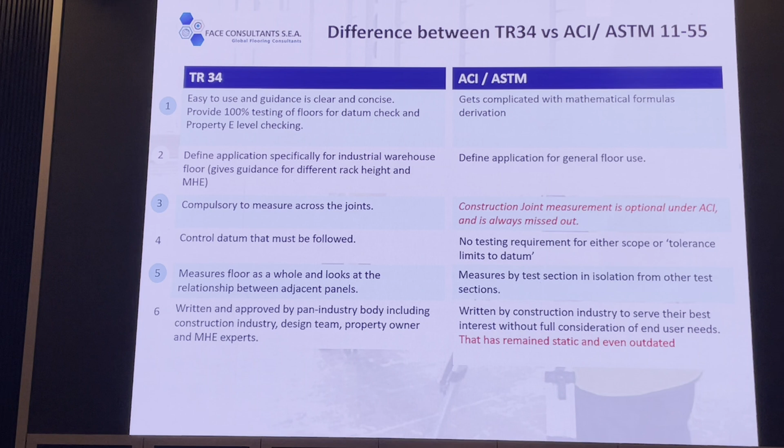So now I'm going to tell you a little bit about the difference between TR34 and ACI in a summary. TR34 is easy to use. Guidance is clear and concise. We provide 100% testing of the floor for datum checks and property E. ACI, it's complicated with mathematical functions. Just press this button here. The document, it's in your thumb drive that's being handed out. It's about 8 pages of standard measurement using ASTM 1155. 5 pages of it are full of all these formulae.

So how many people here have got a mathematical degree that understands all this shit? Sorry, there's one more. But it's full of stuff like this. So people only look at the answer, they don't look at the method. Line 2. Defined applications specifically for an industrial warehouse floor. Gives guidance for different rack height and MHE. So the TR34 says for this type of truck, this is what you need the floor to be. And as it goes up in height, you need a bigger and better specification.

The ACI doesn't cover that, it just covers generalities. You're left with somebody needing to interpret it. And I can tell you, in this part of the world, the people who are specifying, which may be you, don't know what it's all about. It is complicated, and you've got better things to do. So, again, the people are coming around saying, I can give you FF/FL equivalent to FM2, blah, blah, blah.

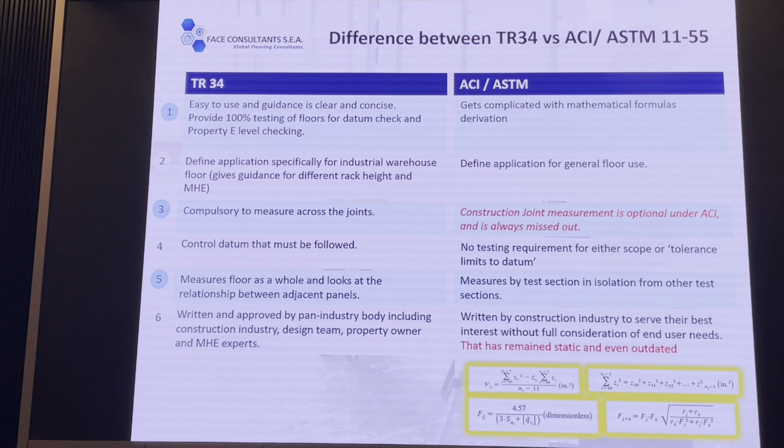Number 5, measures the floor as a whole and looks at the relationship between adjacent panels. We had situations in the US where a panel is over here and a panel there, and we didn't build them to the same TBM. But AutoStore wanted to go from there to there. I don't know if many people know much about AutoStore. Look it up on the internet, YouTube. Fabulous system. But it needs a flat floor, and it needs to be flat throughout.

Property number 6 here. Written and approved by a pan-industry body. This is a big one. Including construction industry, the design team, engineers like yourself, property owner, and MHE experts. The working body for the TR34 is made up of everybody that's involved, all of the stakeholders in this process.

The ACI ASTM was written 45 years ago by self-interested main construction people and concrete people. Nobody else is involved in it, and that's why it's a general specification for different things, as we said before. And that's why I would say that they need to update this big time, if they want to use it, big time.

The reason that people use it in Malaysia and Indonesia and other places is because people can go out and buy a dipstick and pretend that they're measuring the floor properly. Maybe that's a strong statement, but that's where it is, because we see so many results that don't represent what's gone. So how do you build a concrete industrial floor which is fit for purpose? So we'll come back to where we started.

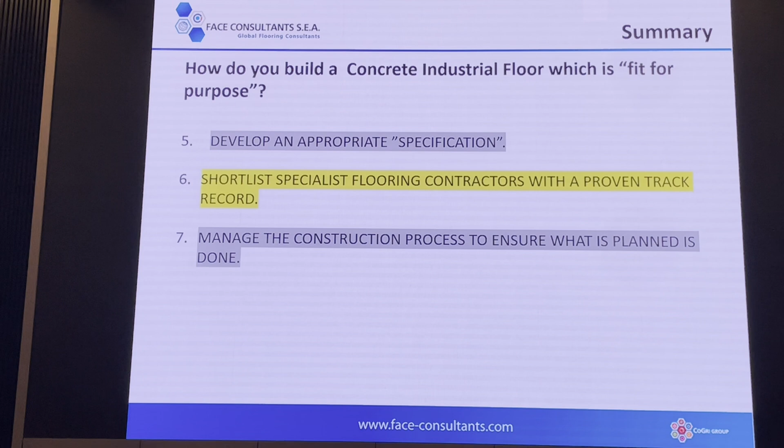Manage the construction process to ensure that what is planned is actually done. Sometimes things get handed over and they wait for the result at the other end. Ensure the right testing and compliance procedures are being implemented. If you don't do that, and you don't use the proper specs, you won't be able to know whether the floor that you've done is going to do what you want it to do.

Now, this next slide is very interesting. I've reintroduced the key people in this process, right? I've done it in a different way. So we've got the sponsors, we've got the material handling people. They're sitting up there, away from the project, because we're all involved in this bit down below. Okay. This is something I hope many people will ask. All right? Can we discuss this one?

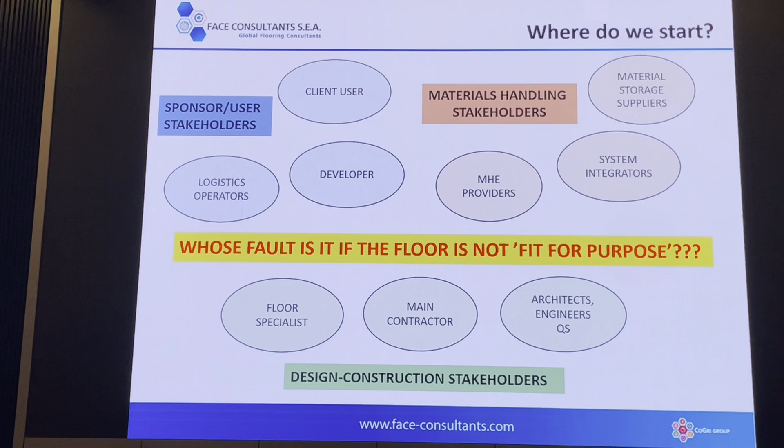So, the question becomes, in this matrix, somebody needs to take overall responsibility if they want to drive it in the right direction. Whoever it is needs to understand what they're trying to achieve and how they can deliver it. But anyway, this is a starting point for me about just putting things out there. Okay, this, I think Mr. Leon, you maybe want to do this later this afternoon again if you want, maybe you want to talk about it. If not, no problem. We'll talk about it again.

Okay, so what I've done in the handouts that I've given you, I said earlier, going round, particular specification, performance specification, free movement surveys, defined movement surveys with further exploratory information. And this is this document. Don't let anybody know you've got this because I'll get a copyright soon, right? I've taken a chance, maybe you look at it so you can see it. But that's the method statement for doing ASTM testing. And if you understand it, then good luck to you, you know? But this is what's being done in the market.

So these are the handouts, and then I give you this handout, just in case you didn't know, the laminate. TR34 covers all this. TR34, very simple. Covers everything you see here. And then you need to do a flow. And that's the other thing I've given you on the laminate. You can see quick tables, and quick guide, and all this. So it's just a handy thing to have around when you're thinking about things. Thank you.

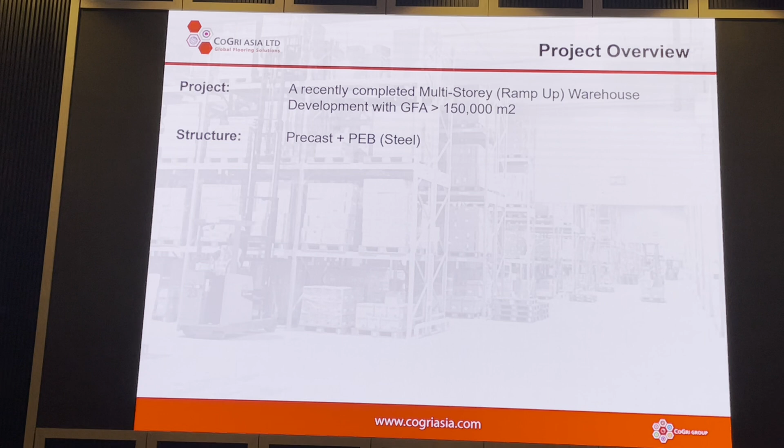This is a recently completed multi-story ramp-up warehouse in Korea, the floor area is more than 150,000 meters squared. Yeah? In the last 5 years, there have been a lot of warehouses of this size or even bigger in Korea. This is not a new project or new design. There's nothing special about this project. For whatever reason, it's just gone wrong. It's mainly a precast structure with some PEB steel on the top as well. It's quite common in Korea.

Just before I move ahead with this case study, I should also explain that, like I said, this is a normal type of warehouse in Korea. Most warehouses follow this similar design. They don't have issues, they get done right. Whatever reason it is, this project has gone wrong. The problem: within months of the logistics operations commencing, widespread floor defects have occurred throughout the floor. The tenants, both of whom are market leaders in the industry in Korea, are obviously very concerned about the short-term durability. Forget the long-term durability, the short-term durability of the slab, and have demanded immediate action from the owner.

So the project brief. Actually, the development was acquired on completion by a global real estate investment and asset manager without due diligence carried out to the floor slab. That's perhaps the first mistake. Subsequently, when the defects became widespread and the tenants started complaining, the new owner engaged Face Consultants Korea to carry out a preliminary floor inspection and condition survey to find out the cause of the problems and try to understand what's going on and the risks, but only to the 50,000 meters squared ground floor. The upper floors have their own problems, but the ground floor has got the most serious problems in this development at the moment.

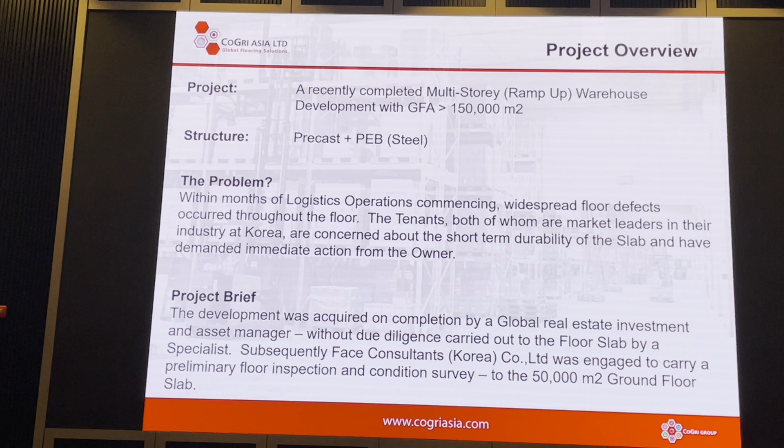We don't know the function of this. This is not a fully enclosed basement. It's not a cold store. It doesn't really need that urethane insulation foam. Okay? And like I said, this is straight out of architectural drawings, and it's clear that the design intent was a slab on grade, SOG, otherwise known as a ground supported slab. We'll call it an SOG in this case study.

So, let's quickly look at the concept of a TR34 ground supported slab or SOG. One is to ensure uniform slab support, which should result in minimal settlement and definitely must prevent differential settlement. That's the worst thing that can happen. Obviously, if there's any doubt about the soil conditions, you need to involve a soil expert. We are not soil experts.

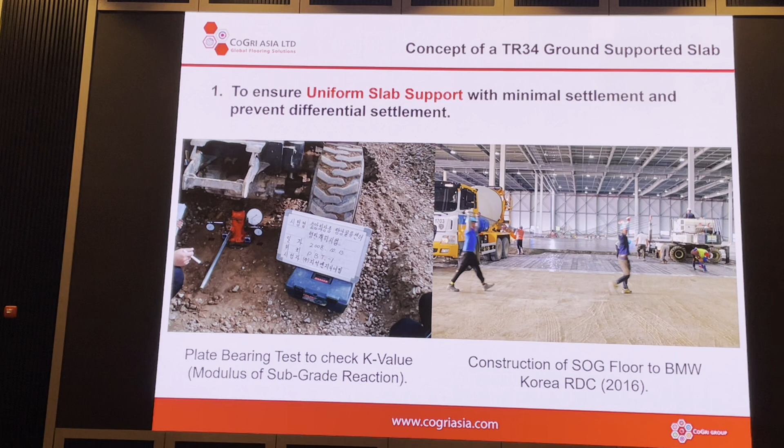Now, one way to check the soil is in the right condition for slab on grade is to do a plate bearing test such as this. That will not give you an indication of long-term or even short-term settlement, but we use the output of this, the K value, in the design of the slab on grade. But it will also give you an idea of the consistency of the soil as well. It might show if there are any concerns or risks.

As you can see on the right here, this is a good example of good slab on grade floor construction in Korea. As you can see, the concrete trucks are directly discharging the concrete, and during the floor construction, that sub-base layer below the concrete is stable, no deformation.

Now, if that saw cut was not deep enough, if that saw cut was applied at the wrong time, the concrete's too hard, if there's too much reinforcement going through that slab, it is not going to induce the crack, or the crack is not going to open. So it's going to fail. One point to consider here, a saw cut joint is a planned crack, but a crack in a straight line, so it's easy to maintain and it looks better. That's simple.

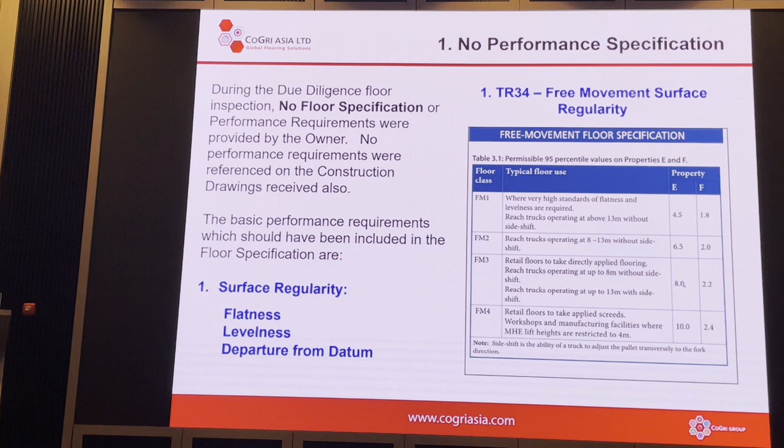Okay. So what went wrong? Let's take a look at what went wrong. First of all, there was no performance specification. During the floor investigation, we looked at all the as-built documents as a new floor. There was no detailed floor specification. There were no clear performance requirements in terms of floor flatness or levelness.

And TR34 has been the basic standard for warehouse floors in Korea for many years already. So there's no excuse. So surface regularity, TR34, we look at flatness, we look at levelness, and very important, we look at departure from datum, and with robotics, that's also becoming more important now, as Colin mentioned.

Typically in Korea, a ground floor slab would be specified to TR34 4th edition FM2. Upper floors, sometimes you've got challenges to achieve FM2, and you've got lower ceiling height, so FM3 is quite commonly used, still challenging to achieve. Sometimes the owner has specific requirements, so the upper floor will also be specified as FM2.

Now the second very important performance requirement for a warehouse floor is surface abrasion resistance. Almost every modern warehouse floor in Korea has a surface abrasion resistance, or AR, specification with testing. Very important. Concrete quality in South Korea is actually very good. So why is this needed? Well, first of all, when you've got a multi-story warehouse floor, you cannot always control the environment. Sometimes the building's semi-enclosed, so you have to consider the environment. That's going to impact the surface abrasion resistance.

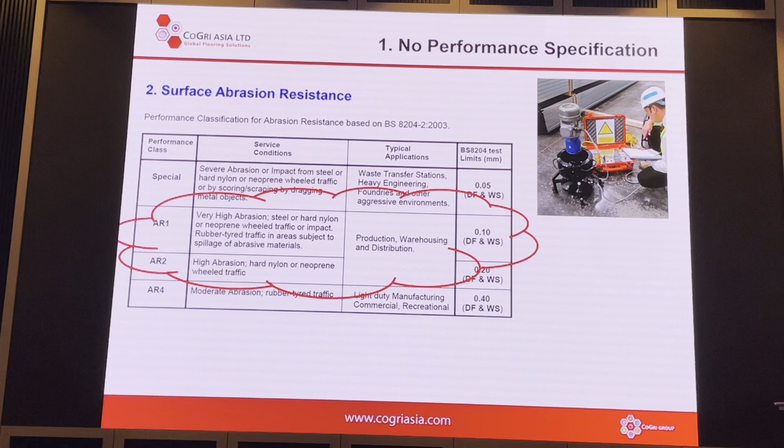But also in Korea, it's very cold in the winter. It can be down to minus 20 degrees C. And main contractors are under too much pressure, they keep going. So there are sometimes abrasion resistance problems in Korea. This is an extreme example of a floor with an AR problem. This is not Korea, this is somewhere else. And obviously it's a serious problem, as you can see. That's actually caused by a small logistics robot, AGVs or AMRs as they're known, turning around in the same location 24 hours a day.

That's the damage MHE can do to a concrete floor if the concrete's not right. So the equipment in the top right-hand corner here, this is AR testing equipment according to British standards specification, which is also a European standard. It's basically an accelerated abrasion resistance tester. It's got hard steel wheels which rotate very quickly a fixed number of times, and you then measure the depth of wear to the concrete.

So typical specification in Korea would be AR1. AR2 is also okay for most warehouse floors. So for AR1, the maximum depth of wear during this test is 0.1 millimeter.

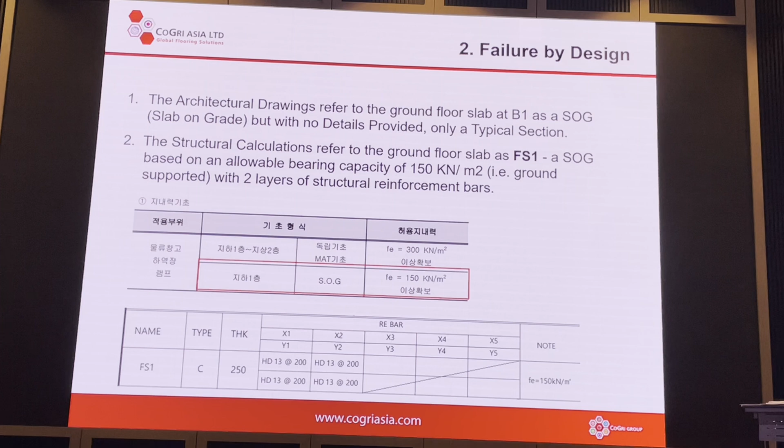So, failure by design. The architectural drawings for this project refer to the ground floor slab at B1 as a slab-on-grade, SOG, as you can see here. No details provided, just a typical section. The structural calculations refer to the ground floor slab as FS1, also SOG. You can see it's stating the same bearing capacity there, but it's also showing two layers of reinforcement bars, HD13 at 200, top and bottom.

However, the structural drawings also include a detail showing the structural connection of FS1, slab on grade, to the beams, plus a concrete pedestal all the way around the edge of the slab. So the point is, the design intent is not clear. It's connected to the beams and parts of the structure. Is it designed as a ground supported slab or is it a suspended slab?

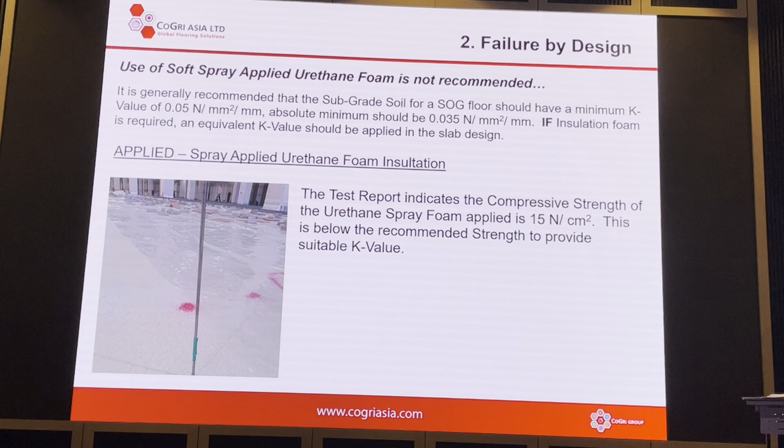It's just too soft. The test report for the insulation foam on this project indicated the compressive strength to be 15 newtons per centimetre squared. This is below the recommended strength to provide an equivalent K-value for a slab on ground floor. Risk and concerns? It's low strength, so you've got a risk of compression or settlement.

This spray type foam is also very difficult to apply flat and smooth, which we need to avoid restraint to drying shrinkage. So more often than not, when we're involved in a cold store floor in Korea, we end up asking them to cut the foam and make it flat. It takes them a long time and a lot of money.

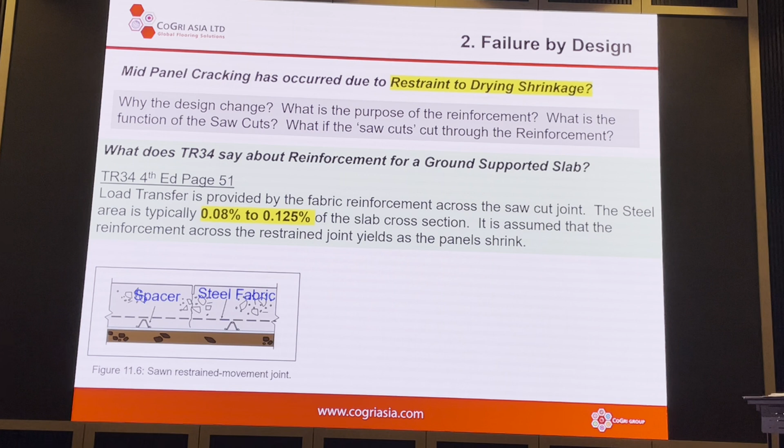TR34 is very clear. It states, load transfer is provided by the fabric reinforcement across the saw cut joint. The steel area is typically around 0.1% of the slab cross-section. Very importantly, TR34 also gives a bottom limit to ensure suitable load transfer across the saw cut joints. It also gives an upper limit to ensure that there's not excessive reinforcement which might restrain the shrinkage.

Two is the saw cut cuts through the reinforcement. That's going to be a disaster because you're going to have curling and many other defects. Let's take a look at that photo. So surely, if a specialist flooring contractor with experience was involved in this project, they would have immediately said, no, this design specification is wrong, this needs fixing. For us, we would have probably said no to doing this contract. We just wouldn't have done it. It's too much risk.

This is a photo taken during the floor construction. What we can see here, a couple of things. One, the direction of the concrete placement is wrong for this methodology with a Copperhead laser screed. It's going to result in floor finishing problems. Secondly, as you can see here, the concrete slump is just way too wet. You can't make a flat floor with this type of equipment with very wet flowing concrete. Concrete mix design, concrete needs consistency, needs control.

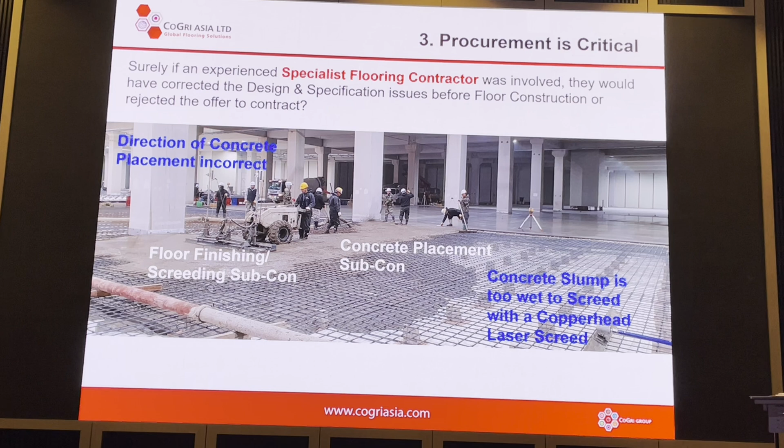So our conclusion is that this team constructing the floor is two separate companies. There'll be a floor finishing screeding subcontractor, and there will be a concrete placement subcontractor. This is a very traditional way of constructing floors in Korea. So clearly not a qualified specialist flooring contractor. As Colin said, who takes liability for defects? Not clear. The owner wants single point liability when defects occur. Procurement is critical.

Compliance testing for floor flatness levels is also critical. The owner should pre-nominate a specialist testing company. For this project, the upper floors were tested to FM3, third edition FM3. And you can see a photo here during the testing. Is this a qualified testing company? We don't think so. Why?

Well, TR34 is very clear. Property E should be measured using a precise level and staff. This floor has been surveyed using a laser to the nearest 1 millimetre. If the limit is 6.5 millimetre, you can't just round up results to the nearest 1 millimetre. It doesn't make any sense. We don't think this is a qualified testing company. This is the correct way, according to TR34, of surveying to property E.

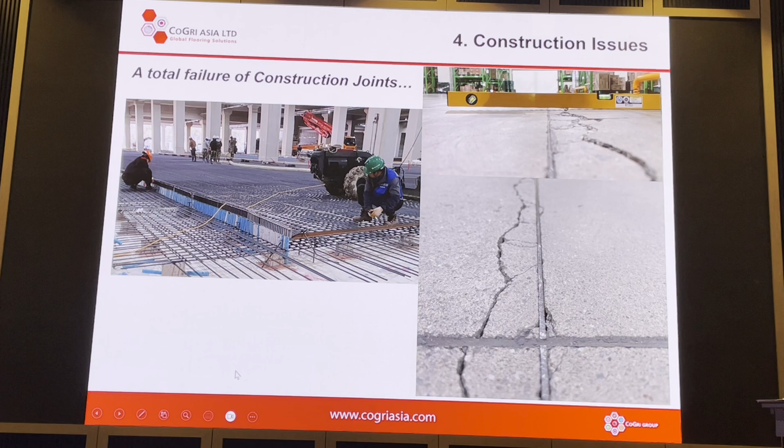Well, one, as you can see, the reinforcement bars are continuous through the joint. It's restraining shrinkage. The floor can't shrink. Secondly, the steel L angles used to control the levels have been cast in place. So it's very simple. The concrete cannot shrink, so it wants to crack. And it's just going to crack at the weakest point in the floor, which is above the joints. We don't know how to fix this. This is a total failure. These construction joints really need removing and reconstructing the whole slab at the joints. It's a big job.

So saw cuts have been cut into the floor, but at 3.3 by 3.3 meter spacing. Why? Perhaps it was driven by a material sales company, we don't know. But TR34 is very clear. Typically, slabs are cut into 6 meter panels. The joints can be expected to open by 1 to 2 millimeters maximum, if everything works out well. So, we've got 50% of the recommended saw cut spacing.

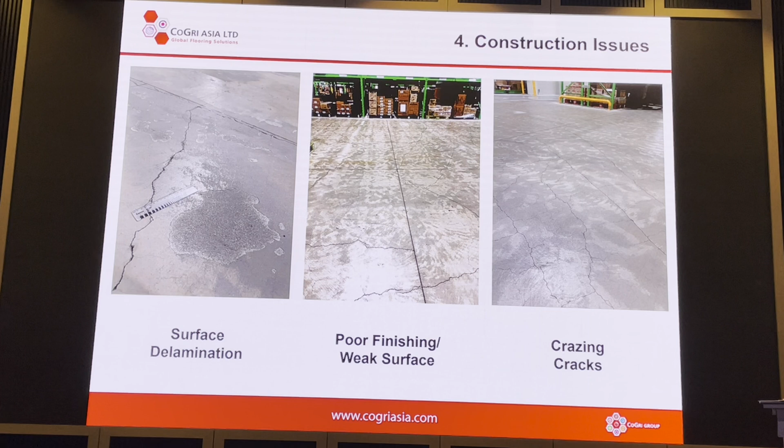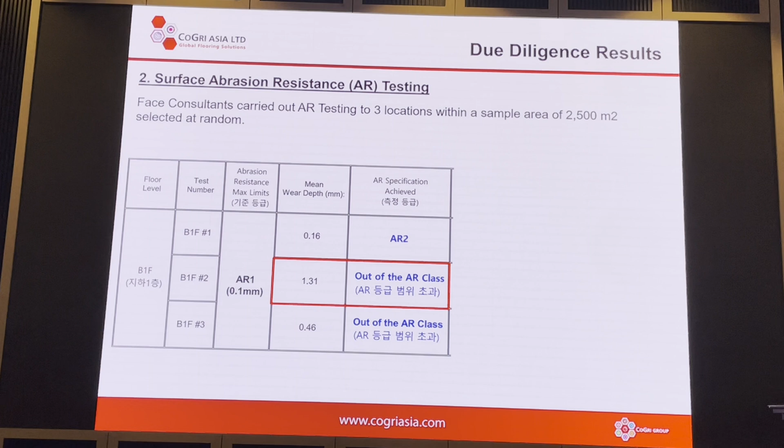Face Consultants also carried out AR testing just as a random sample of 3 floor locations. As you can see, all 3 locations have failed to achieve the requirement of AR1, in one place by a long way. Yeah? And there's a big variance in these 3 readings, big variance, which tells you there was a lack of control over consistency of the concrete. That's clear from these results.

Yeah, and that's the result of AR testing. It's a serious problem. And again, this is not a simple fix. A floor fails AR like this, you can't just grind, polish, and put some liquid on it. It's not going to do anything. This floor needs a major renovation.

So, what about remediation? Could do a temporary repair, but if we do temporary repairs, you would have significant continuous repairs. You're going to be doing annual maintenance throughout the floor. A lot of disruption, a lot of downtime. The tenants are going to be moving out. They're not going to be happy.

Permanent repair. The floor's only been used 6 months. So how to permanently repair this floor? There are defects throughout the floor. We really don't know. Worst case scenario, either some areas or the whole floor might need removal. This floor's going to get worse very quickly. It's clear. So the cost of this floor is going to increase very rapidly, and the owner's not going to be happy.

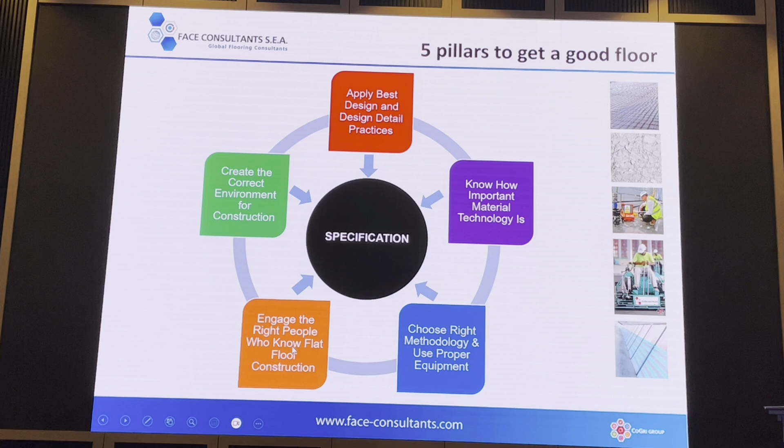So let's go back to what Colin introduced in detail earlier, which are the 5 pillars to get a good floor. Quick reminder: best practice, design and detail; understanding material technology, especially concrete, reinforcement, construction joints; selecting the right methodology and the correct equipment for the specification, for the client's or end user's requirements for the floor; selecting a specialist. That could be a specialist consultant, flooring consultant, and a specialist flooring contractor. Could be a design and build contractor. Choose someone with a proven track record.

And then controlling the environment. For me, when I talk about controlling the environment, it's not just stopping wind, rain, sun entering the concrete while you're placing and finishing it. It's controlling the site conditions. If you've ever been involved in a multi-story warehouse project, a big project like this, it's difficult to control the site conditions. We need good support from the main contractor to make a high quality floor for a project like this.

So let's look at the summary of defects and also compare to these 5 pillars. Can we minimize the risk of these defects by applying the 5 pillars? Let's take a look. One, this is not a cost-effective design. This is very clear. Engaging a specialist, better methodology, better control of materials, detailed design specification. The cost of this floor would have gone down, not up. That's clear, especially considering long-term maintenance costs that are going to result.

We have a future risk of differential settlement. Again, most of these pillars can control that. We've got widespread structural cracking. Yes, a combination here, we can control that. Failure of construction joints, same answer. Surface delamination, the environment as well is a factor on delamination. You want to prevent the wind, rain obviously, and sun and so on.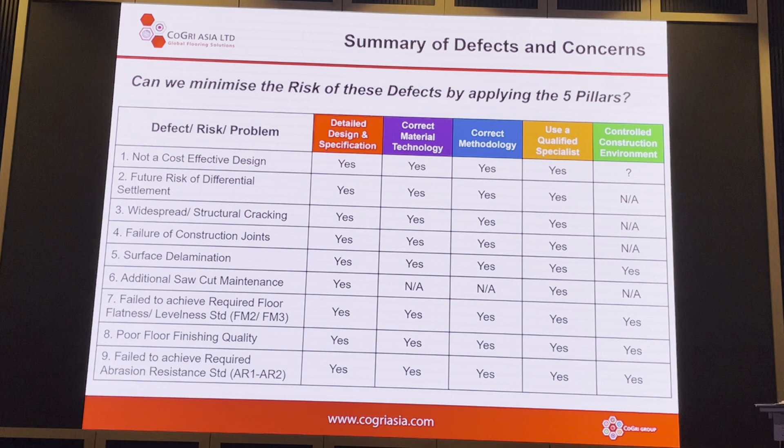It's sitting directly on a 0.3mm slip membrane and a 200mm sub base, which is basically well compacted granular material, and that needs to be constructed as flat and level as possible to allow the floor, the concrete, to shrink in that first year. The steel fabric, we've used one layer of steel fabric reinforcement, a secondary reinforcement, and because it's not structural, we put it at the bottom. Top or bottom is not really important here.

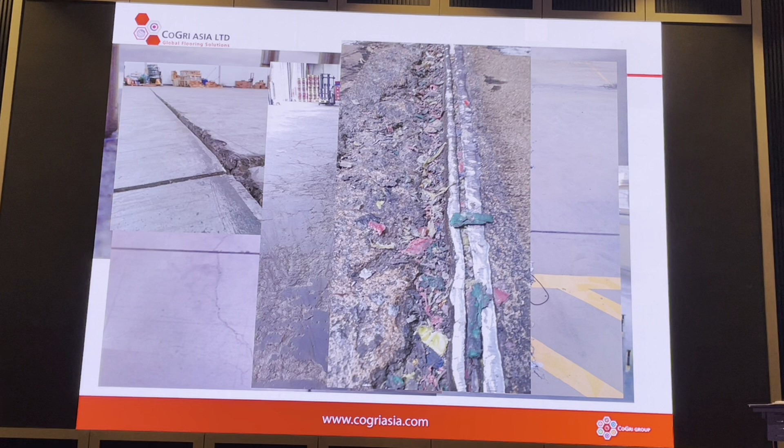There are many defects that occur in floors. Weak surface, joints, delamination, failed joints, curling, and serious problem with that one there. Many things that can go wrong. The good news is, by focusing on providing a floor that is fit for purpose, all of these defects can be minimized or prevented. It's not complicated. It's just following basic standards, best practice standards in construction industry. It's not rocket science.

One, identify and understand what the floor is going to be used for. Listen to the client, listen to what they want, how they're going to use the floor. Two, carry out good principles of design and detailing. Use a specialist, always recommended for warehouse floors. Three, establish the surface regularity requirement with reference to TR34, or if you do it correctly, ASTM is fine. Don't over-specify. We don't need to over-specify. We listen to the requirements for the client.

Choose the suitable construction technique and methodology. Develop an appropriate specification without over-specification. Procurement, shortlist the specialist flooring contractors, select companies with a proven track record. You can keep the cost down by obviously having a competitive tender, as long as those companies are qualified. And then manage the construction process. Again, basic standards of QA/QC throughout the whole process. And I say again, good support needed from the main contractor.

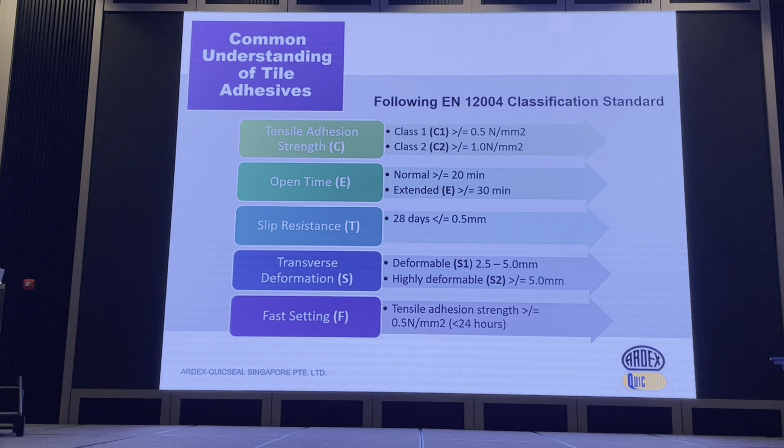So in the market, very commonly, one of the classifications and specifications that we depend on to select tile adhesives is the EN 12004. It has different criteria, and if you look on the left, you can see the C, E, T, S, F. These are categories to determine the performance level of the adhesive. For example, if we say that we have a C1 tile adhesive, it means that the adhesive has an adhesion strength of at least 0.5 megapascal at 28 days. I will not run through all the requirements. I'll just pick some important ones to highlight.

And then you have this transverse deformation, which is represented by S. This refers to flexibility, how flexible the tile adhesive is, and it is represented by S1 or S2. So when the tile adhesive is able to deform up to 5 mm, meaning that the adhesive is flexible, it will have an S1 class. And for highly deformable tile adhesive which can bend more than 5 mm, it will have an S2 class.

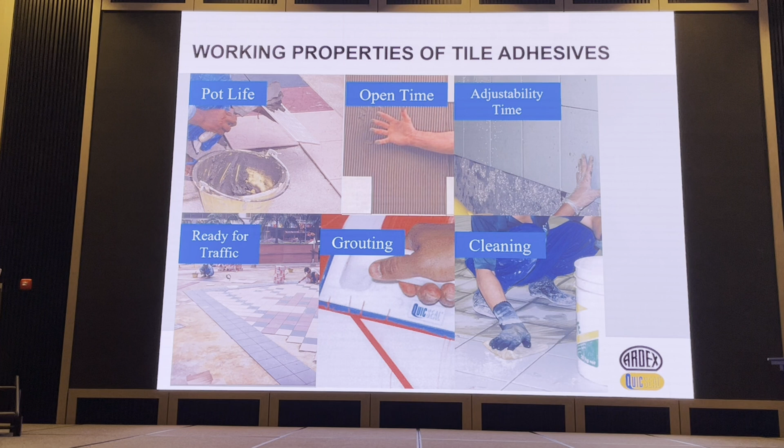Okay, setting time refers to the drying or curing time of the adhesive before other works can be carried out. For a normal set system for screeding, it takes 7 days for every 10 mm thickness of screed to cure before tiling can start. And for tile adhesive, initial curing is 24 hours before grouting works can commence. If you are looking at the rapid setting system, initial curing of screeds can be as quick as 24 hours, and foot trafficking in 2 hours.

And for tile adhesive, when you're using a fast set tile adhesive, you can actually do grouting after 2 to 3 hours. So it saves a lot of time when using a rapid set system, but at the same time, the rapid set system is more costly.

So when we look at application, again, moisture content of the substrate is an important factor to consider. Make sure that the substrate is fully cured so that it minimizes moisture movement from the substrate through the joints and prevents debonding and staining of tiles. We recommend a surface moisture content below 6% before tiling can take place.

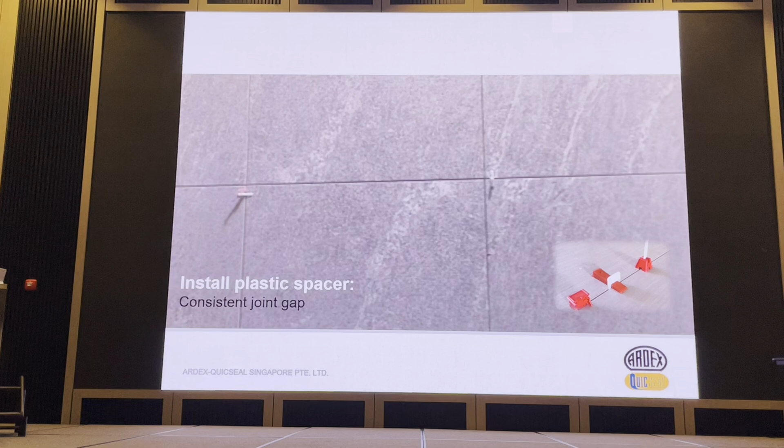And next, check on levelness. Check the evenness and level after laying tiles. You can do so by putting in plastic spacers to control the level and also to control the grout joint width.

So similar to the tile adhesive specification under EN 12004, there is also a specification for tile grout, under EN 13888 and ISO 13007. This gives criteria for tile grouts that are suitable as a grouting material for filling up tile joints.

So for selecting tile grouts, in the technical data sheets you should be able to see the classification of the tile grout. Like I mentioned for tile adhesive, if you look at EN 12004, some tile adhesive products have a classification of C2TE or C2TES1. This classification gives you a guideline to compare between different tile adhesives. Likewise, for tile grout, you have CG1, CG2.

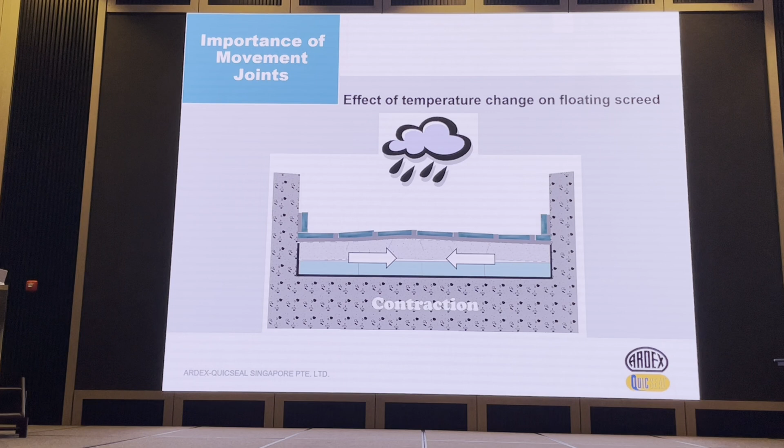And then we have the effect of temperature change on floating screeds. If you do not have sufficient joints, there is no allowance for movement, and ultimately what you end up with is buckling due to lack of movement joints. So you can either include movement joints based on the guidelines in CP68, or you can include what we call perimeter joints, that is, movement joints installed around the perimeter of a room.

This was adopted in some of our residential projects where tiles buckled due to movement, and what the contractor did was include a perimeter joint in each room, so that when there's movement, the perimeter joints help to cushion the movement and prevent the tiles from buckling and debonding.

So what you need to do is cut a strip of joint filler board about 100 to 150 mm and apply a thin coat of adhesive. Then stick it around the perimeter of the wall. Then cast the cement sand strip and pre-cut the joint filler about 3 to 5 mm above the strip level. Do not cut through the joint filler, just cut about 3/4 of its depth so that it still stays in one piece. Apply the tile adhesive and then lay the tiles.

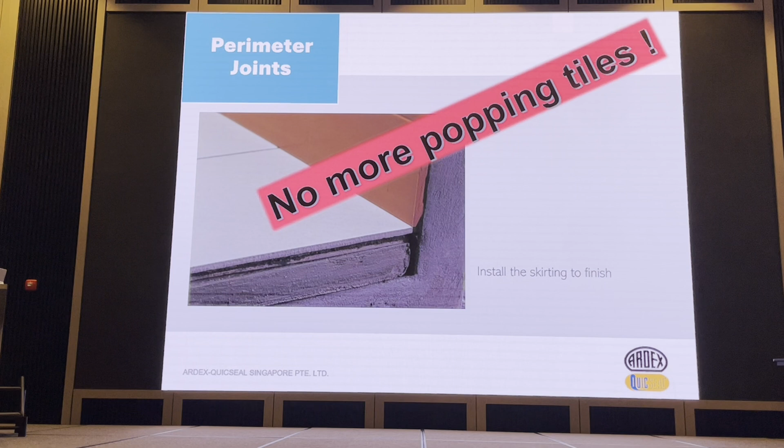So some common defects relating to tiling, and the common causes of debonding could be due to inadequate provision of movement joints, incompatible tile and bedding material. Like I mentioned just now, if the back of the stone is treated with an impregnator, then you have to conduct your own internal test to ensure that the adhesive that is used to bond the stone is compatible. Or the concrete or screed is not properly cured, or incorrect installation practice is done. For example, the tile is placed over the adhesive past the open time.

So this is a case study, popping tiles in residential. About 2,000 cases of dislodged tiles were reported in 2016 and 2017, due to differential thermal expansion or contraction of the tiles or change in temperature adding more stress beneath the tiles.

And how to prevent this? Firstly, make sure that substrate preparation is done correctly and the back of the tiles is clean before placing tile adhesive. Make sure that the tile placement is within the adhesive open time. Do not put the tiles over the adhesive when it has already skinned or is past the open time. And if you are experiencing popping tiles in your unit, for example, you may want to install perimeter joints, and then check for hollow sounding at the end of the installation to make sure that you have sufficient coverage.

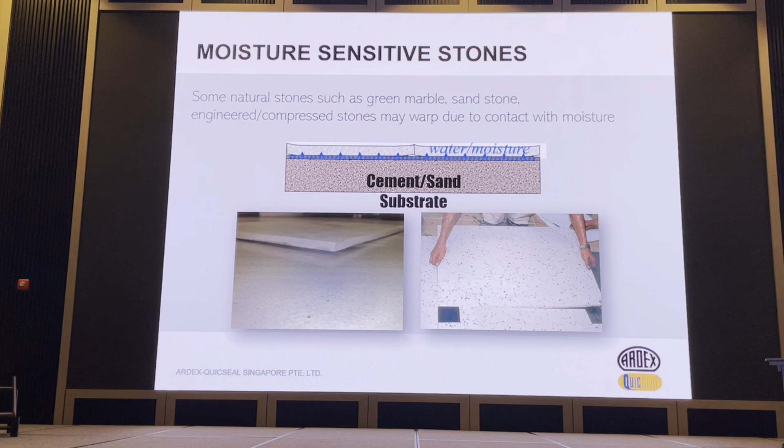And moisture sensitive stone is another class of finishes that require special attention. This type of stone may warp due to contact with moisture. So what happens is when you place these stones over a bed of adhesive, the stone starts to suck water from the adhesive and it causes warpage around the corners. Eventually there will be debonding, and when you do the tapping test, you will find hollow sounding. We'll touch on the solutions later. And then you have leakage caused by warping of compressed quartz. This is also caused by warping at the four corners.

And the solution to moisture sensitive stone is to use a rapid setting tile adhesive, or a resin adhesive like epoxy adhesive. So why fast setting tile adhesive? Because a fast setting tile adhesive accelerates the hydration of the adhesive and holds the stone before it starts to warp. A normal set adhesive has a longer setting time, so before the adhesive gains strength, the stone has started to warp already. So for moisture sensitive stone, you need to either use a rapid setting adhesive or a non-aqueous adhesive like an epoxy adhesive that does not contain water.

So a rapid setting tile adhesive allows traffic in 2 hours, early strength gain, and it has low shrinkage, high tensile strength, and extended open time. With a rapid setting tile adhesive, you will find that the open time is similar to a normal set, but it will set faster than a normal set tile adhesive.

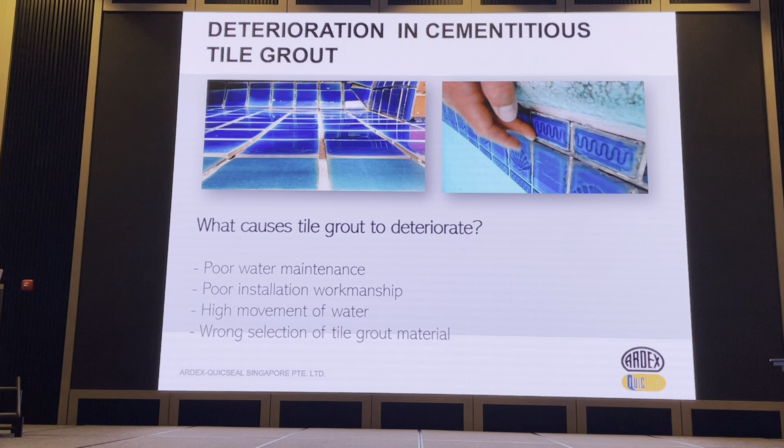Some causes of tile grout deterioration in swimming pools are poor water maintenance, poor installation, high movement of water, and wrong selection of tile grout material. So in summary, there is unbalanced water used in the swimming pool, and depending on the calcium hardness, the pool water will use the free calcium present in cement grout, leading to deterioration and etching because of the difference in pH and alkalinity. So normally we have to investigate the pH of the swimming pool water if there is a tile grout deterioration issue.

So we mentioned epoxy grout. Ardex has a very good, durable epoxy grout called Ardex EG 15. It is available in different colors. It has good chemical resistance, excellent water and abrasion resistance, and is water cleanable. When we use epoxy tile grout, one of the criteria is that it must be able to be cleaned from the surface. If you look at this photo, in a tile grout operation you spread the grout over the whole surface of the mosaics or tiles. After you have filled the pointings, you have to clean off the remnants of the grout left on the surface.

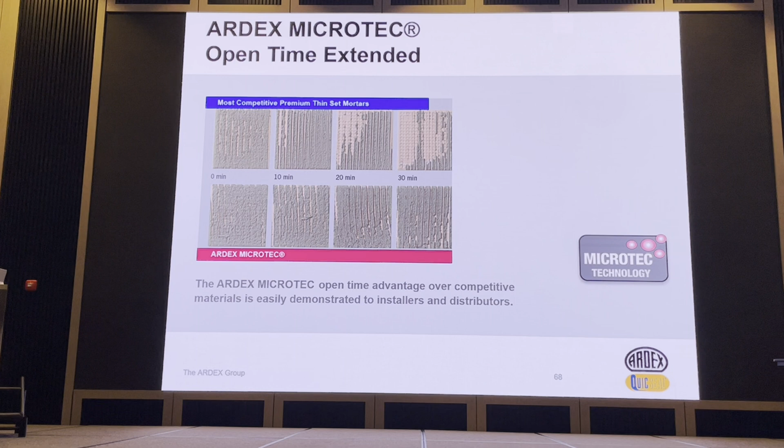But as you leave the tile adhesive to air dry for a longer time, 10 minutes, 20 minutes, 30 minutes, if you look at the 30 minutes, you see that the premium thin set mortar has very little coverage, meaning that the tile adhesive has already started to skin. But with a Microtec tile adhesive, you are still able to achieve maybe 85% coverage. So the difference in open time and coverage actually helps to enhance the bonding of the tiles to the substrate using Microtec.

And then we have another series which is the rapid setting tile adhesives, and this uses Ardurapid technology. It uses a special binder to deliver high early strength within the first 6 hours, and during the curing stage, water is completely consumed, resulting in no water surplus, and a shrinkage-free high-strength system is achieved, which virtually eliminates the risk of water staining. So again, this sets us apart from the market fast set tile adhesives, and the Ardex X685 utilizes the rapid dry formula technology or the Ardurapid technology in the engineering.

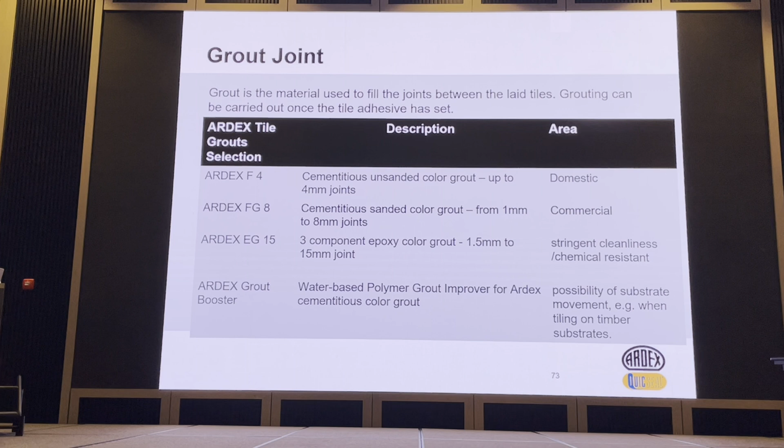This is our color grout for cementitious. Altogether, there are 18 colors that you can select. And then for epoxy grout, there are 8 colors.

And then we also provide protection to floor tiles immediately after completion or after defects have been rectified and surface cleaned. Quicseal 705 is a polyethylene reinforced with fiber for protection of newly laid finishes, and is lightweight, easy to transport and recyclable, meaning that after you have finished the work at one site, the workers can bring it over to the next site to use. So you actually have one roll and you can reuse it at many sites.

And quality control, you can do a random test on the tiles using a steel ball rod to observe for hollow sounding. If hollow sounding is observed, then you can map out the hollow areas, determine the cause, inspect the installation method, and assess the impact before deciding on the repair methods.